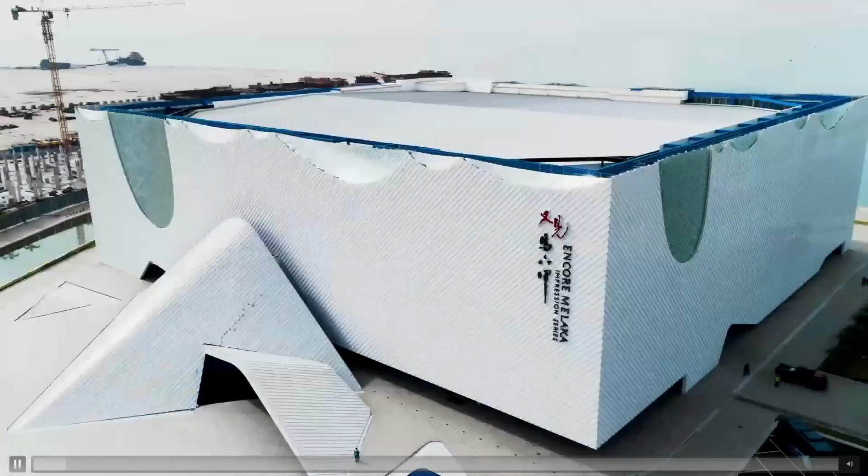In the still rapidly developing nation, new buildings sprout each day as a sign of advancement of society, both in technology and aesthetically. Swissma has been leading the total solutions provider for roofing and wall cladding in Malaysia. Equipped with the highest technological support and innovation, our team put great care in our work, aiming for total customer satisfaction by advanced research and fulfilling the needs of our clients. Swissma guarantees everlasting returns for stakeholders, while also providing precision manufacturing along with customized fabrication, creating endless possibilities.

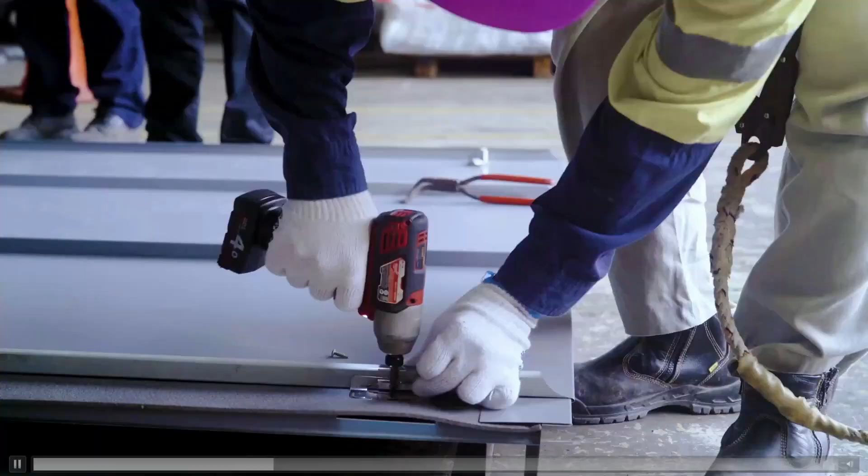Our services include on-site production, providing installation training, craftsmanship quality, engineering and R&D, technical and architectural consultation, receiving multiple award-winning titles such as the Brand Laureate Best Brands Award 2015-2016, Sin Chew Business Excellence Awards 2016, the Brand Laureate Best Brands Award 2016-2017, the Brand Laureate Best Brands Award 2017-2018.

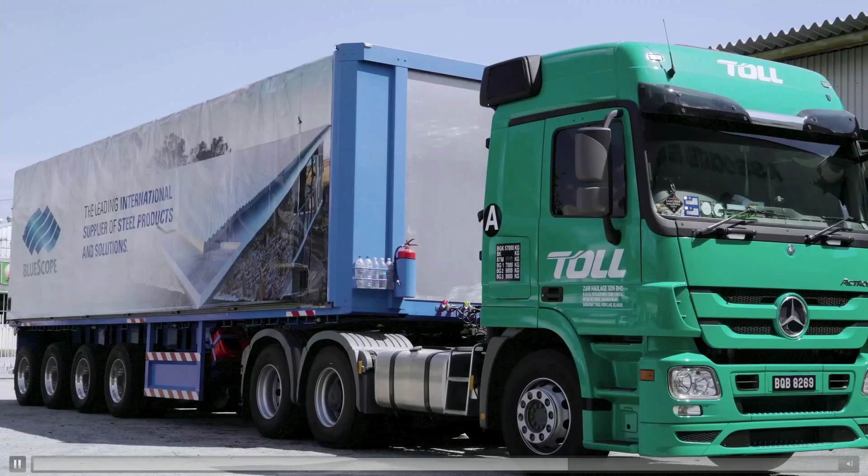Swissma offers sustainable customized solutions using different materials such as aluminium, stainless steel, copper, titanium zinc, TPO or PVC membrane that is FM approved. Most importantly, working in strategic partnership with NS BlueScope Malaysia for solutions in Colorbond steel. Also not limited to specialized projects being public amenities and infrastructure, commercial buildings, industrial buildings, residentials.

Our company philosophy is to provide products and services of the highest quality with sincerity and integrity. With high-quality materials and top-notch service, we are one of the top providers for the industry with a guarantee of satisfaction and excellence in our name. Swissma, your innovative and trusted total solution provider for roofing and cladding. In the still rapidly developing nation,

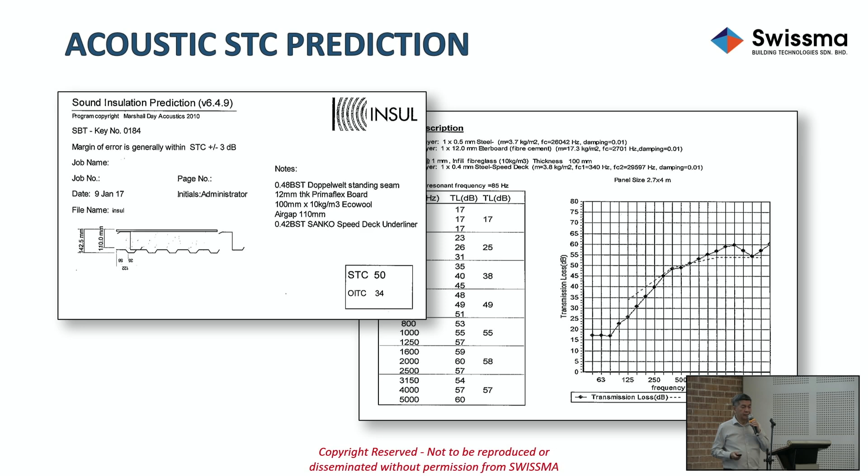So in designing the roof system, first of all, we have to understand your project needs or your technical requirements. For example, the thermal insulation, the U value calculations. Today, it is mandatory that you need to comply with a certain thermal value, which I'm going to share later. Then we also have software to assist in developing a roof system to meet acoustic STC value. That will be another topic on its own. Gutter downpipe sizing, we have software. We can also help to do a quick check on your design if you need that.

Shop drawings, this is one of the key points. In any project, in order to be executed well, shop drawings are key. So we provide shop drawings, and having understood all your needs, then we will customize the roof system.

Material options. In Swissma, we provide a very wide range of material choices. So from Colorbond steel and zinc from BlueScope Steel, titanium zinc, copper, stainless steel, aluminum, and even TPO membrane. You have seen some of these projects in the video. So for coated steel, we work as strategic business partner with BlueScope. So we only buy and sell coated steel from NS BlueScope.

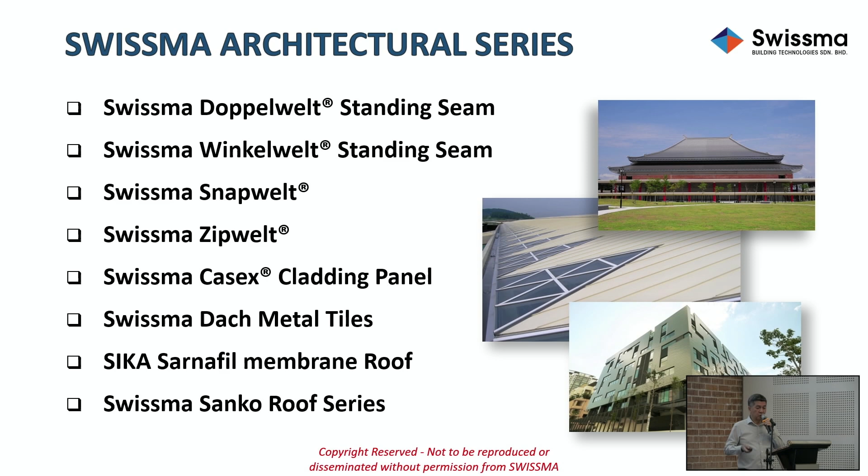We carry a very wide range of profiles. Here is our architectural series. We have the Doppelwelt standing seam, Winkelwelt, Snapwelt, Zipwelt, Casex, metal tiles, membrane. And we also have a Sanko roof series. I will not go into this product because this is just to let you know that we do carry a very wide range of profiles.

So what I'd like to highlight among the architectural series is the Swissma Doppelwelt standing seam. You can say this is our signature product. Just like a restaurant has a signature dish, we have this as our signature profile. So why is this so great? Because it can cover any shapes or geometry. This profile can be tapered and curved, hence its unlimited ability to cover any forms.

Next, we have the Sanko roof series. Sanko is a Japanese brand that has collaborated with us as a partner since 1974, when Dr.

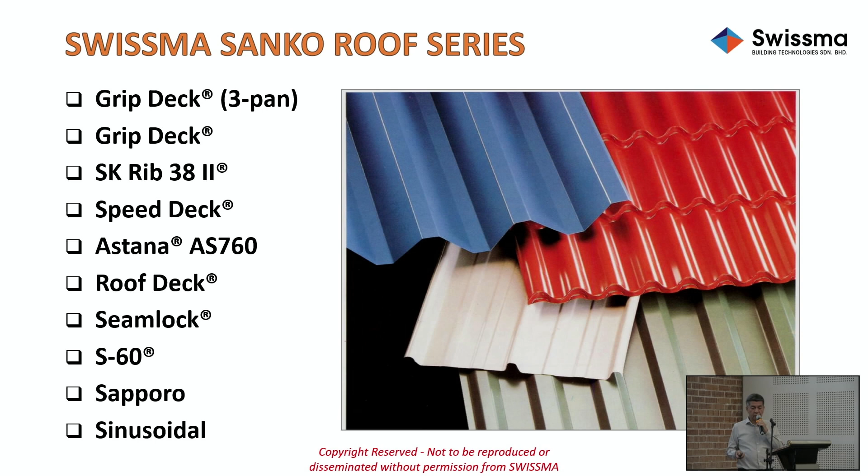M brought in the first wave of Japanese FDI. So in Sanko itself, we have, again, a very wide range of profiles. This is the most commonly used profile, the Sanko grip deck, which is what I'm going to refer to as a clip lock tab in my technical sharing.

And we have very unique profiles like seam lock, which is very deep and is concealed fixed. You saw the video on the site forming, that is the profile. Very good for long length, low pitch roof. This is the deepest profile you can ever get. Looks like a gutter, but it is a profile that is so strong that it can even span 11 meters. You don't need close support spacing.

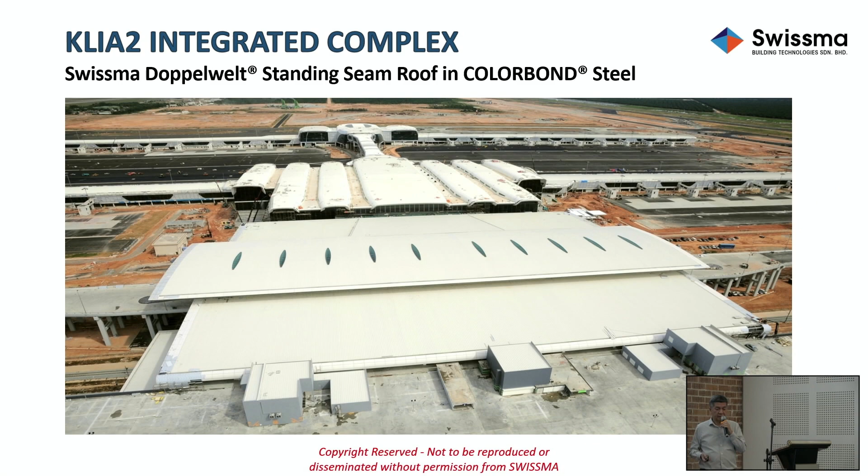So just to showcase some other projects, the KLIA2 projects, we have the Sama Square using a colorbond material, Setia City Mall, IOI City Mall, another mall, KSL Esplanade. This is another, Setia City Convention Center. University Malaysia Pahang, private bungalow in titanium zinc. Another private bungalow, mass housing, another one, hangar.

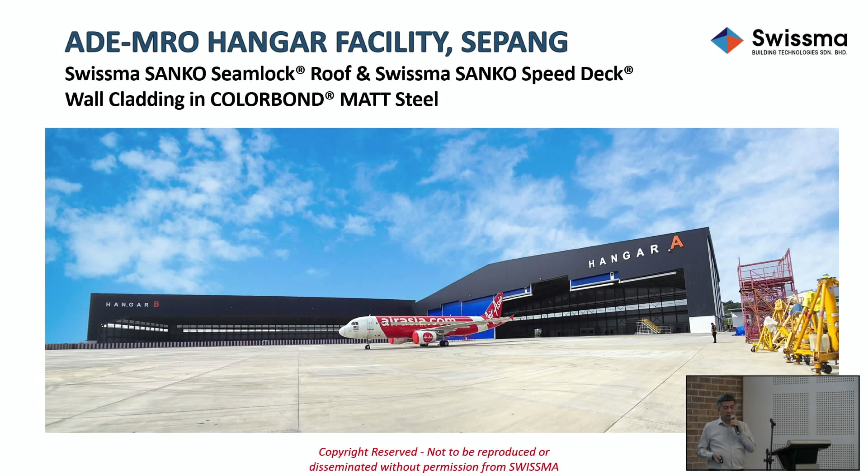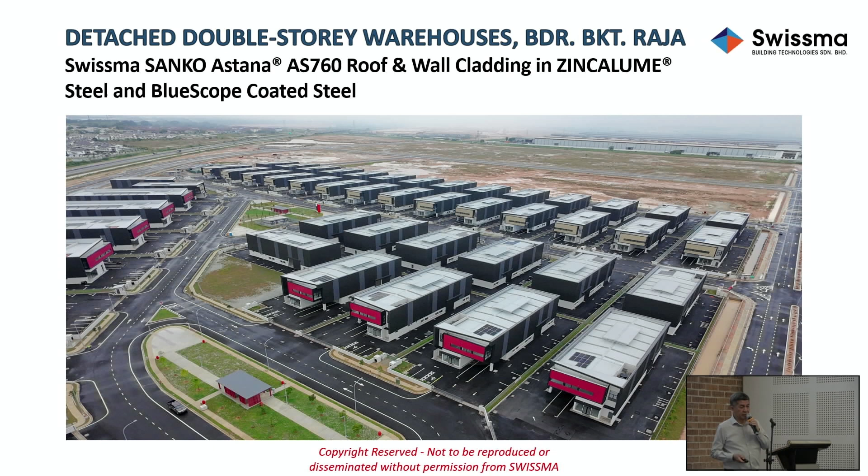So that's a quick sharing about who we are. Thank you.

So now I'll move on to do my sharing on some of these innovative roofing for architects, and I'd like to share from experience some design elements and also what to look out for at the site. So this is just a brief content. The first thing is nowadays I think all of you are already aware that you need to have sufficient insulation to meet the UBBL Clause 38A. Then I'll share about oil canning, something that you can't avoid, and some flashing details, and the use of proper tools, and some sharing of customized shop drawing details. And lastly, some do's and don'ts, which I think is important that everybody knows.

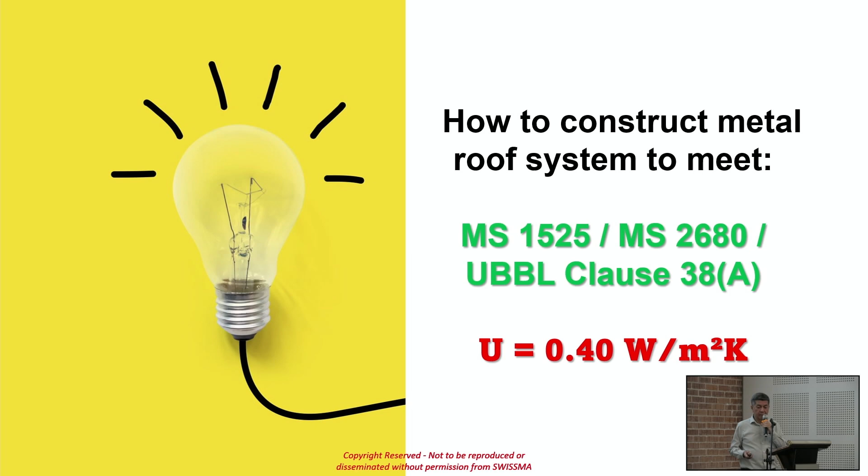Okay, how to construct a metal roof to meet the UBBL Clause 38A requirement. It started from a standard, MS 1525-2680 for residential, and now it's been adopted in the UBBL. So this is an extraction of the UBBL standards, and what it says is for lightweight roof below 50 kg, you need to have a U value of 0.4 watt per meter square Kelvin. For RC roof it is 0.6.

So a very simple formula to share. It's just 3 parameters. First, the K, the thermal conductivity, which is a material property that you need to be aware of. Then you've got to work out the thermal resistance, which is material thickness over the K value. And then, tada, your U value is already achieved. Just a simple formula.

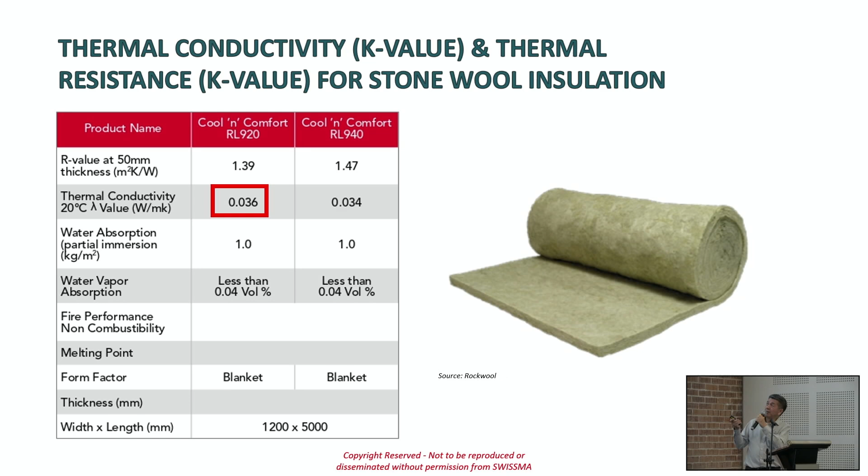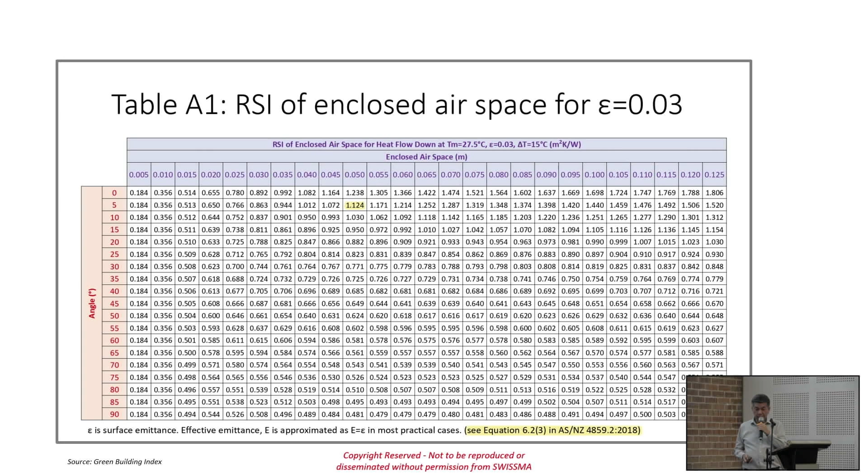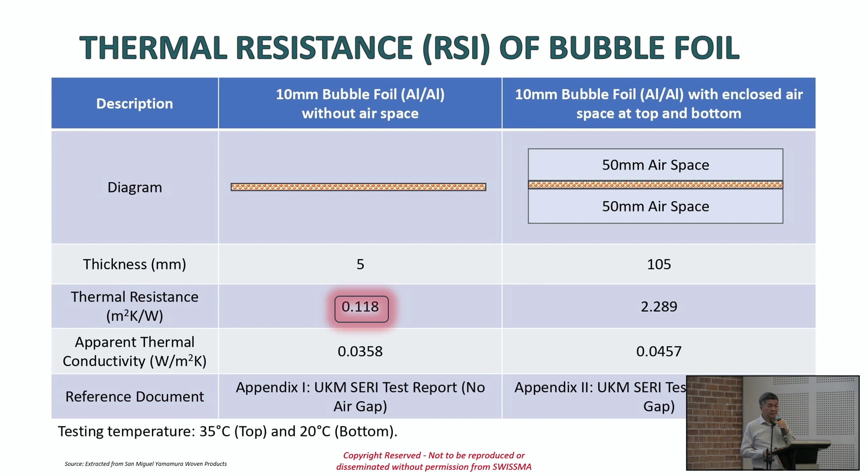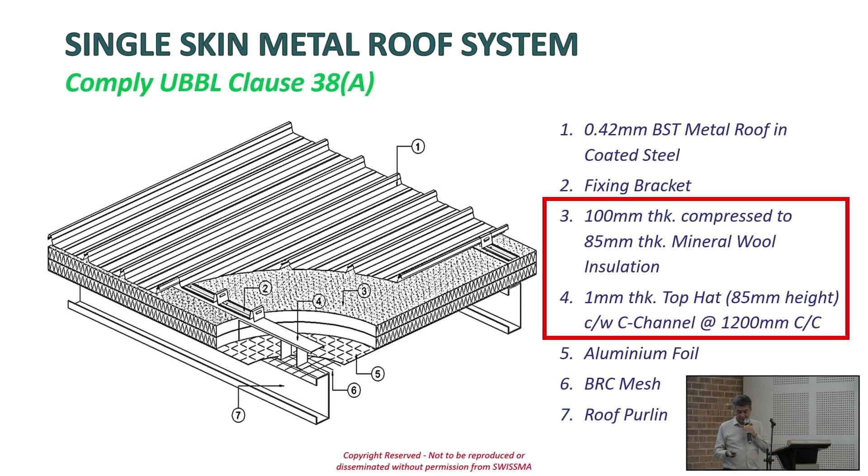So what do you do? You need to increase your insulation. Here, approach number 1 is we recommend 100 mm thick mineral wool, and then you compress it to 85. Why compress to 85? Because the calculations say that all you need is just 85 mm thick to get your R value, to get your U below 0.4. So if you put 100, of course the R value is better. This one is like cukup makan.

And there is a very good reason why we recommend to use 100 and let it be compressed, and that is to achieve rain noise dampening. Because with a metal roof, there are two main concerns: there's heat and there's noise. So if you address the thermal insulation without addressing the noise, then it's not a holistic solution.

So I'll just quickly show you how it's constructed for a single skin. That's the purlin. You either put a mesh or you don't, because today the foil is self-supporting. Then you have your foil, aluminum foil. You've got to use the non-tearable foil, not the paper foil. Then this is what we call the subgirt. You need this subgirt to achieve consistency of your insulation depth.

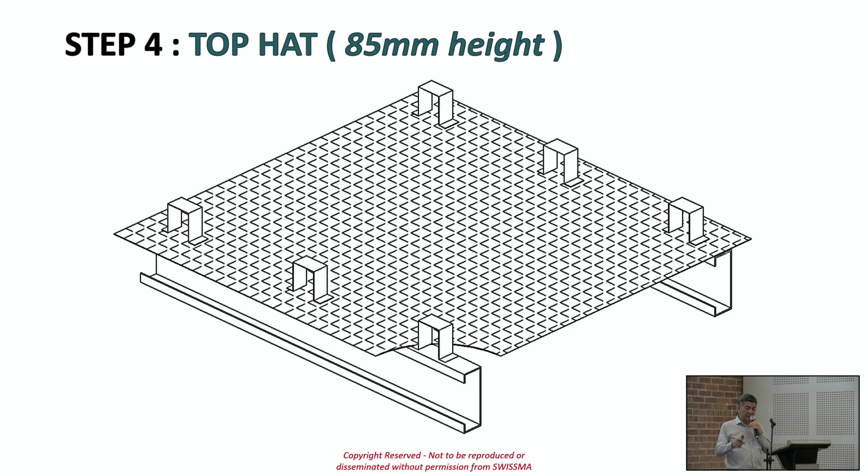The system calls for 85 mm minimum thickness of the wool. So how do you construct to ensure that you always have the 85? So this is how it's done. This top hat is 85 mm tall. Then we add on a C. This is just one approach. To us, this is a hybrid approach. Another approach is to use a continuous top hat. The cost will be very high, but it's more stable.

Then in the market, a lot of them are using just a Z section. But the Z is the least stable among all the systems. So here, then you lay your wool 100 mm thick. It's either one layer or two layers of 50. And then you install your top skin, your roof system. So when you install your roof, the 100 mm thick wool will be compressed down to 85. You can't go below 85 because it's restrained by the subgirt. Then double skin is pretty much the same.

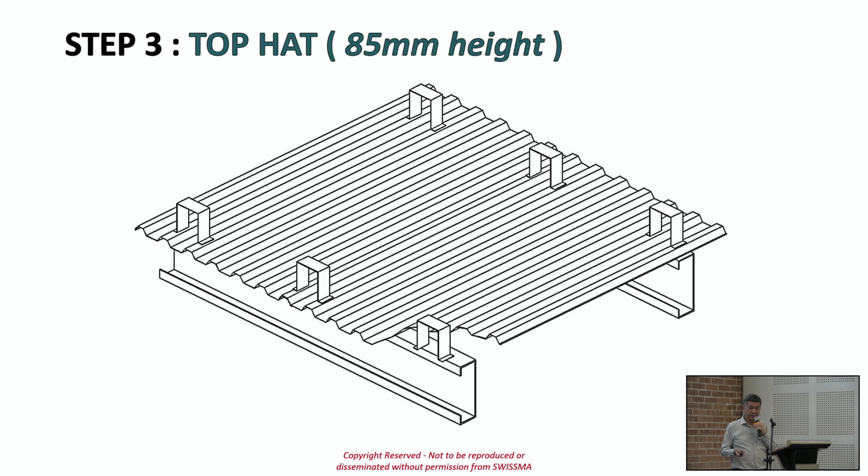Except your first layer, instead of a foil, you have, I'll just show you. Instead of the foil, you have your deck, a metal deck. Then you add on the subgirt again. Usual, same stuff. Then here we put a foil. The foil doesn't contribute to the R value. It's there as a vapor barrier. Okay, if you put a bubble foil there, you don't get the 2.8. That's the biggest mistake. Then you finish up. Okay.

So there are so many ways to construct a roof system just to meet the U value. I've been asked by architects when they have so-called VE submissions, is this okay? Does this meet? So first we look at the calculations, then most importantly, I don't look at calculations alone, I look at the construction, how you construct. So this is another approach. Air is free. So why not capitalize on what is free?

So here we have 50 mm thick uncompressed wool sitting on the underliner metal deck. Then our top hat, or in this case, I just purposely show the Z as an option, is 100 mm tall. So your 50 mm wool is below. Then we install another layer of foil on top of the subgirt before we install this metal roof. So what we get is a 50 mm cavity we call the reflective airspace, which is this, right? There is an R value of 1.124.

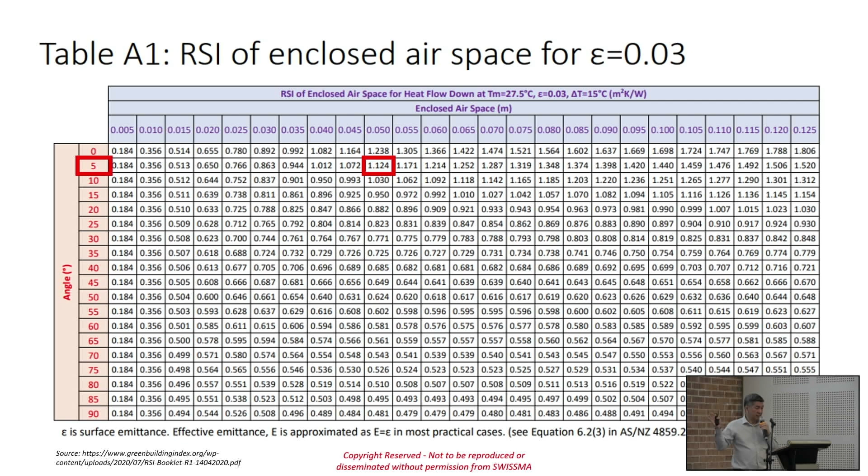This is reflective because to be reflective, you must have a foil. Without the foil, it's non-reflective, and your value is going to be very different. So just to blow up, this is the degree, 0 to 5. For a 50 mm cavity, reflective airspace, your R value is 1.124. So that's the calculation. You have your reflective airspace, 1.12. Tada, you get your 0.37.

Now, like I said, MGBC, or the GBI, they have this attic space R value. So if you have a ceiling in a residential house or project, unlike a factory, you have an attic space where you have air. So in this case, we only need a 50 mm thick wool, and combined with the R value from the attic space, we are able to achieve that U value to be 0.36 even.

Now the key point about this is, I've encountered again and again many times, this calculation is submitted, but you don't know how they construct. And I even have a project case where we submitted a mock-up with a Z. Why a Z? Because we have to maintain 50, right? It cannot be less than 50. So to maintain the depth of 50, you need a Z to control. A lot of projects just do conventional 50 with the foil, magic, no Z. Can that be achieved technically without a Z?

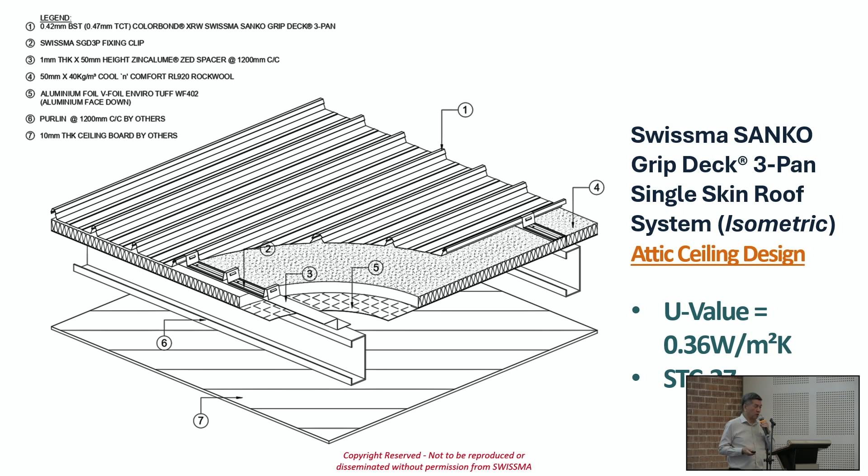You can't. And there are projects done that way, and I'm sad to say, this is due to lack of understanding. The calculation shows 50 mm with the attic R value, but the construction does not ensure you have a 50. It's compressed. So that system failed to achieve the design intention. So this is what I like to emphasize: do ask the supplier to provide a mock-up. I even have a case where the final conclusion is Swissma needs a Z to achieve U, Company X doesn't need a Z. I mean, what kind of conclusion? And that was a real life example. So it's due to lack of understanding.

So then again, there is an AS/NZS standard. I'm not sure whether GBI is going to recognize this. They have a fantastic R value for the inside surface film, 0.8. Normally this value is 0.17. So again, you've got to look at the calculations, and you've got to ask where they get the value from. You just cannot plug in any numbers.

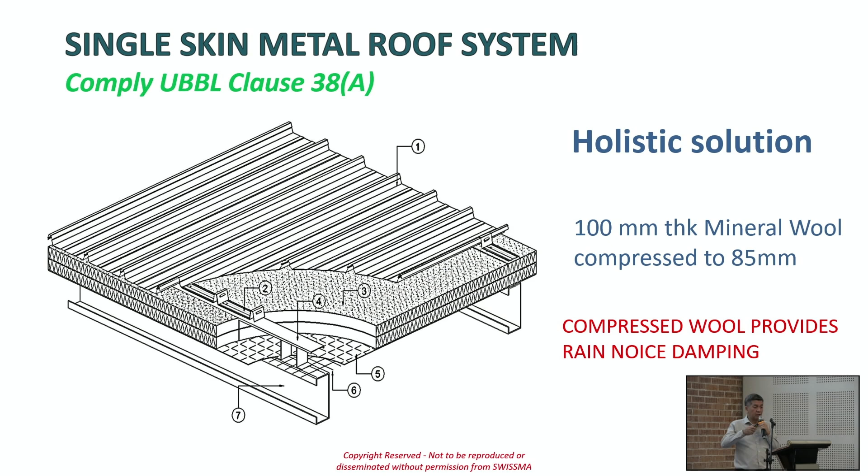So this is how it looks, the one with the 50 mm air cavity. So this one, like I say, meets the U value, but there is no rain noise damping. So you have a U, but you do not address your rain noise. So then again, the compression one, 100 to 85, you do address some decent rain noise dampening. That will give you a more holistic solution.

So then again, non-self-supporting metal roof, single skin. Non-self-supporting are the architectural profiles like this standing seam. A standing seam profile is just a profile that is flat, like you can see, can be 530 or 525 mm wide with 2 upturns. So practically, in layman's terms, it's a flat sheet. So when you have this kind of profile, there's no corrugation, there's no strength.

It's non-self-supporting, right? When you have no strength, that's why we call it non-self-supporting. So this is how it's called seam. It's double seam, like the Coca-Cola can that you look at. These are the double seam.

So you need a support. In this case, the support shown here is a plywood, or it can be a cement board, something rigid and continuous, not intermittent. And then we have a foam. That foam is introduced as a noise dampening foam. It's also an insulator. And in the case of a metal deck as a support layer or underliner, the foam also will separate the two metals.

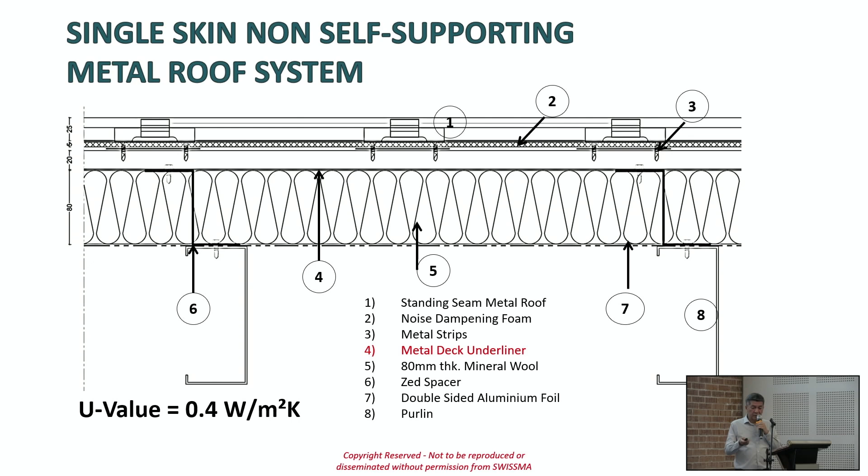So this is an example of the U value, same 100 mm, but what I want to highlight is the construction of it. So you do the same stuff, right? Up to this point, the normal trapezoidal corrugated profile, you just install the roof on top, the clip lock type. But for this, can you actually install your standing seam over this finish layer? The answer is you can't. Very obvious. There is no rigid support.

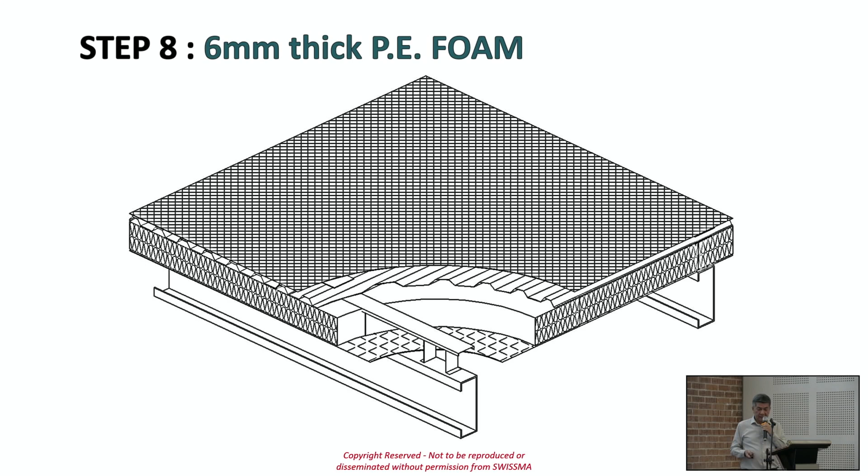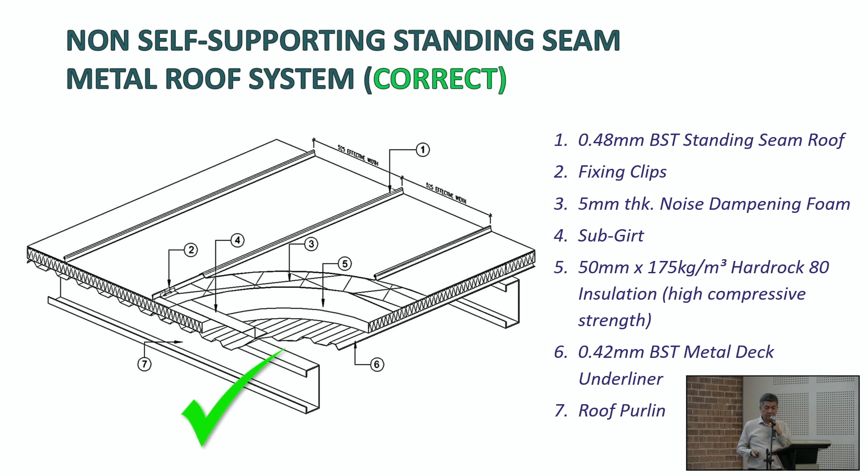So, this is a serious outcome of not having a system done properly. This will be a permanent damage. So this is not oil canning. Later I will share that they think it's oil canning, but it is not oil canning. I have industry players who do this. This is a real life project. I will not quote - I have industry players in this room as well, and I hope we are all promoting the right system for the market, for the benefit of the industry and for the benefit of consumers as well.

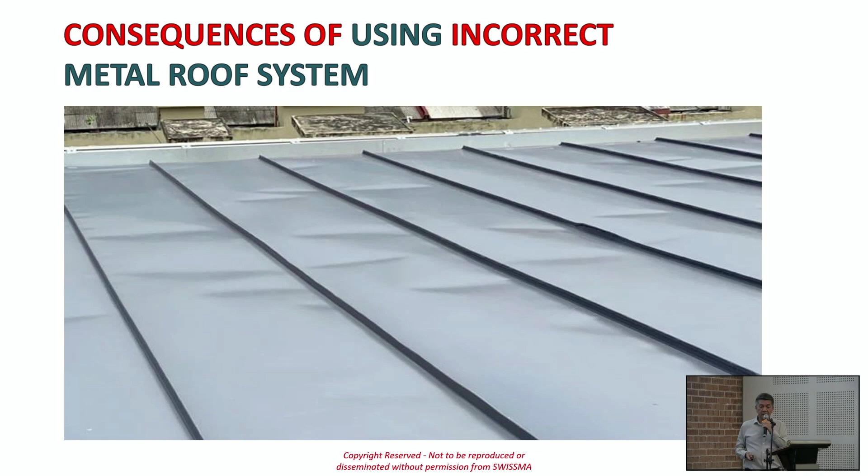Okay, next, oil canning. So what is oil canning? It is some perceived visible waviness, right? It's waviness. Like just now is dented, not waviness. So profiles commonly with broad flat areas, like the architectural profile, are more likely to display this waviness compared to the corrugated. So the corrugated profile, like the Klip-Lok, also has this oil canning, it's just that it's not so apparent. You have a lot of ribs, a lot of mini ribs. When you have a flat surface, it's very, very telling and very apparent. So then the degree of waviness is really tough to measure - they actually measure the wave height.

So it's impacted by lighting or weather conditions - hot day, sunlight, west side, after rain, cold weather, the waviness varies. It looks different. I've got a lot of feedback saying, hey, why is it so wavy on a hot day afternoon? Then in the early morning it was okay, acceptable. So this is not defects. These are just the inherent characteristics that I want to highlight. So this is oil canning.

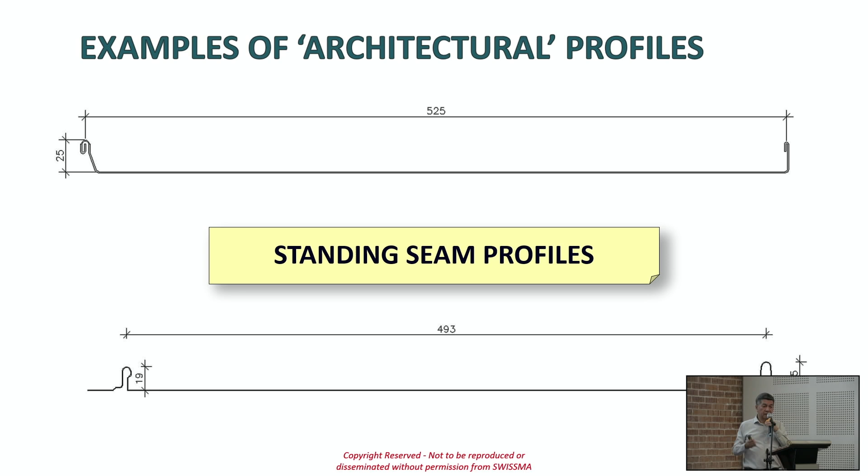Thermal expansion. If your system does not allow thermal expansion, then when it expands, it causes stress, induced stress, and then it will buckle. It's some kind of buckling that causes oil canning. The standing seam has sliding clips to allow for thermal expansion. If you install without the sliding clips, then you will have a more serious effect of waviness, and you won't know why.

Then material thickness. Thin material tends to have more serious oil canning, so thicker material is better. Again, it has to do with the support. If your support is not in alignment, it's going in and out, it's pulling the material, definitely you have very serious oil canning.

So what do we do to minimize it? Generally, the thickness - the thicker, the better. But you cannot say I want a standing seam 1mm thick in Colorbond steel. It cannot be done, it's too hard to fold. Because you've got to fold it very severely, it will crack. If you use non-ferrous metals like aluminum, titanium, zinc, yes, you still can manage, but that's about it.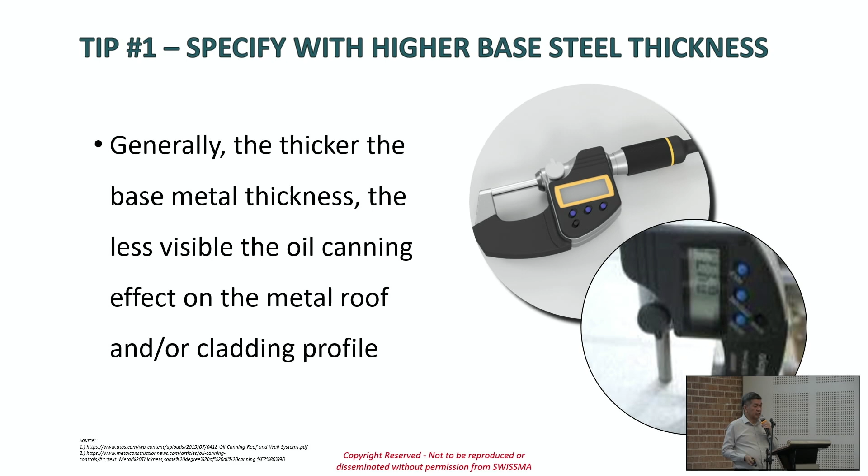So color - this is again very subjective. What we gathered from research is that lighter color... this is about matte now. Of course the matte finish would be the preferred choice. When you have a very glossy surface, it amplifies your waviness.

Then the color. Apparently lighter color - before this I always had the belief that dark color will be a better choice, dark matte. But apparently dark color has one inherent characteristic: it absorbs a lot of heat, which induces more expansion and movement. Also, dark color as a background seems to amplify the waviness. I'll share some photos later. But if you use a textured or embossed surface, it diffuses the reflection, and you can achieve a better finish.

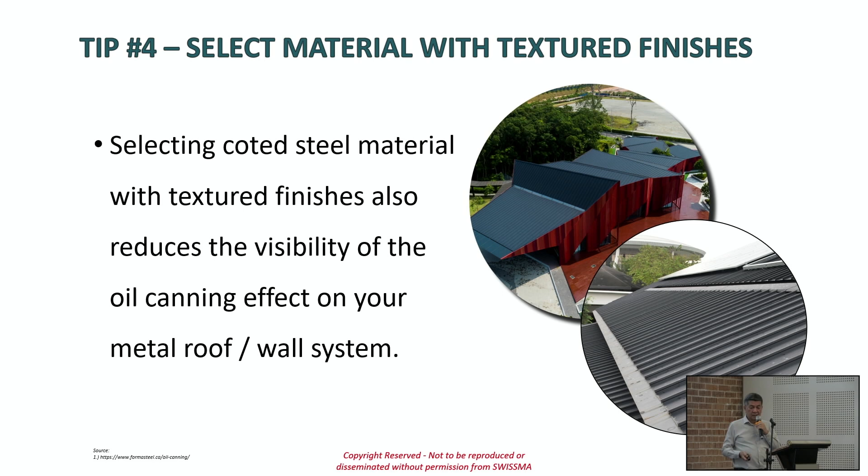So this is Alameda, 1mm thick aluminum. It's very nice, but it burned 3 of my seaming machines on the job because the machine from Europe is not designed to take that thickness. So it's by force - but like I said, this is a good example of minimal oil canning.

These are foreign projects. If you look close enough, you can see the oil canning, because once you seam, you move, you induce stress. The less you disturb it, the better you are.

So for standing seam, we have a single lock and a double lock. Single lock is one fold, 90 degrees. Double is double - you fold it down again. For cladding, if the wind is not severe, we go for single fold, because the second fold is going to induce a lot of stress, and that's where you get more serious oil canning. But we have a snap lock system that looks like standing seam that you actually click on without inducing stress, like the link.

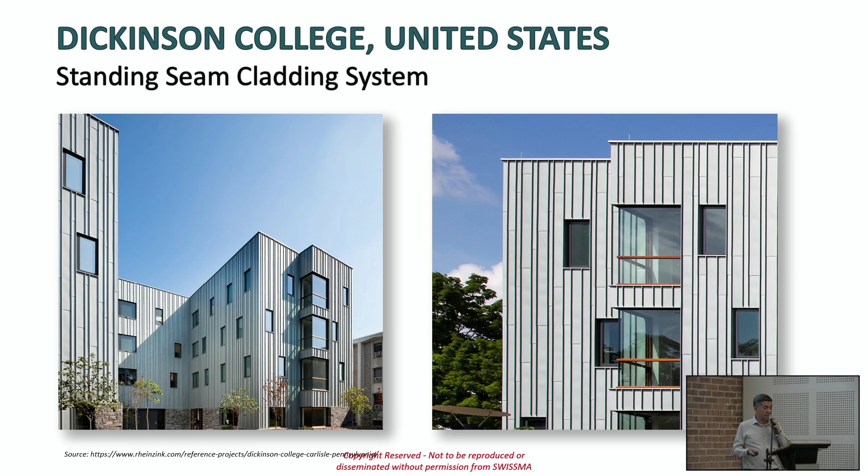So next, sharing some flashing details. This is a typical ridge capping, all right? Everybody does a job with a ridge capping somewhat like that.

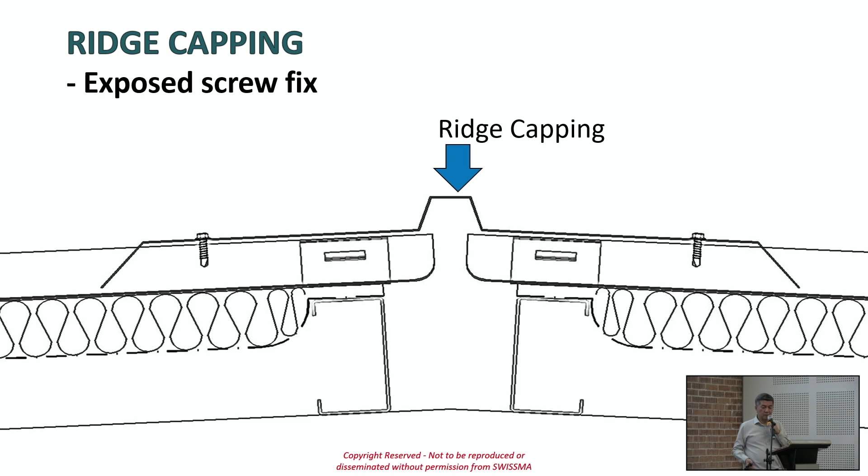Like this project, what I'm trying to emphasize is screw-on, where you screw the ridge capping onto the profile. But can that screw be avoided? Can you have a concealed fixed ridge capping? Certainly you can, like this. We do all our standing seam profile with concealed fix.

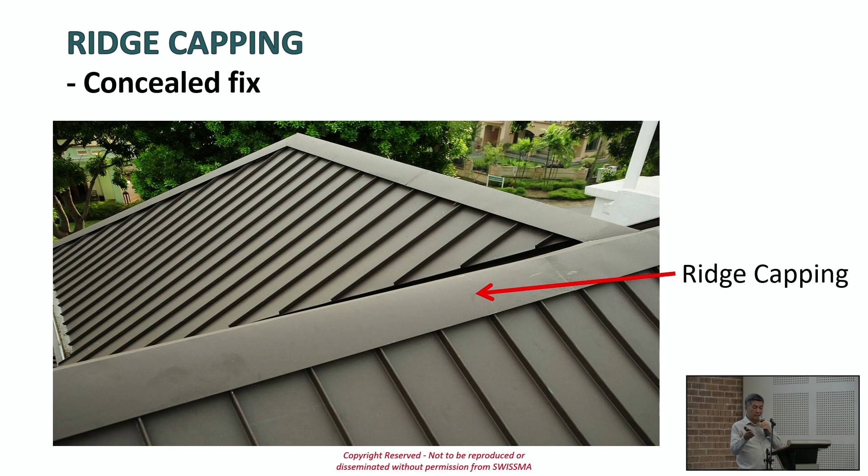Concealed fix, because that's where you get your quality. You pay a lot more to achieve a high-end finish. Imagine you screw up on the ridge. So similarly, this kind of concealed fixed ridge can also be done on the clip lock type.

It can be done, the only thing is it has to be specified and costed in. I'm talking about reality here. You don't go to your project and say, hey, I heard this can be done, why aren't you doing it? Who's paying, right? It's always the case, I always have this issue confronting me.

Then your flashing size, why so small, it cannot cover that? Your BQ says it's only that big. Anything bigger, who's paying? I'm just highlighting these are real life issues.

I've been on the roof on projects where I've been questioned. I look at it and ask, why so small? Yeah, it should be bigger. Then the contractor says the BQ states that is the size. To extend that, who's paying?

So the developer also stays silent. So again, what you want has to be translated into documents so that the system design and cost is captured.

Standing seam screw fix ridge capping is also done, because you cannot reject it if you didn't define it. You didn't say it has to be concealed fix. So typically for a gable end, if you're talking about a clip lock type, that's a screw fix, right?

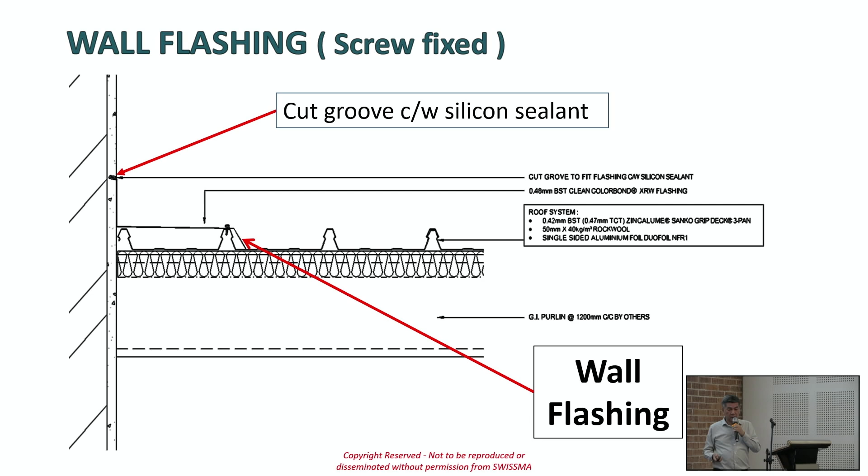So to me, it works, but it has to work well with good workmanship. Otherwise, we recommend a better solution: double flashing. You can have your first flashing without a cut groove, just tuck it in, open the joint, and put some silicone there - that's your secondary defense. Then on top, you have another flashing to cover this.

And here you can cut groove too, same detail, so you have double protection. One more point why this is more foolproof - because this one on its own is attached to the roof.

When the roof expands due to thermal expansion, especially with very long lengths, it pulls the flashing, so your silicon gets weakened. So on a hot day you might get more problems due to the expansion. So this, again, is good to have, but please cost it in, budget it, and draw it in so QS captures everything and it will be okay.

So another thing from observation of industry practice - true or false: flashing must always be GI, flashing must be specified in gauge for thickness, and flashing must always be thicker. This is what I've extracted over the years of my experience. I've been in this industry 37 years, right from the very beginning to now. This doesn't change from 37 years ago till now, the only reason is cut and paste. So, is it true?

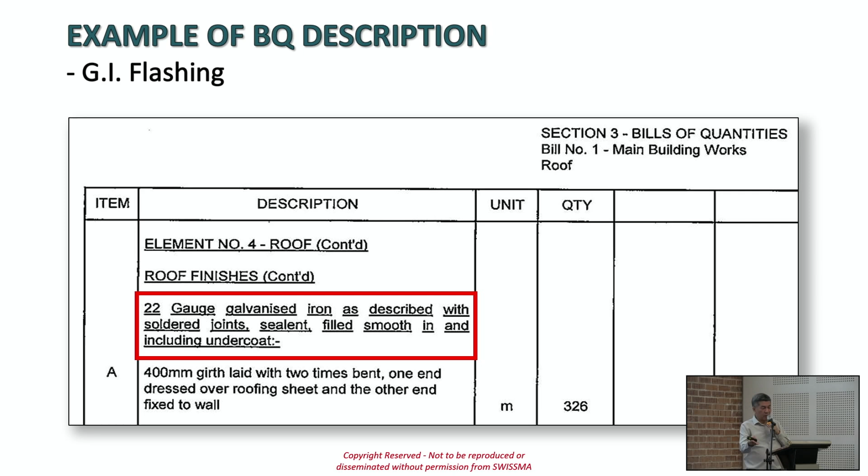You did it for gutters in those days. I don't think you can get anybody to do soldering now. The tinsmith soldering shop has also closed already. Okay? So this is your tender BQ. Can you imagine? And it's true. It's a real BQ. So it's GI gauge 22.

Can anyone tell me how thick gauge 22 is? How thick? Is gauge 22 thicker or gauge 24 thicker? Anyone take 24 as thicker? No? 22 is thicker. The smaller the number, the thicker. It's more for the wire gauge, all right?

So gauge 22, the project guy who wants to do an honest QA/QC also doesn't know what thickness to check. Right? There is no meter to say gauge 22. It's only mm. So gauge 22 is supposed to be 0.7. But again, the word gauge is like thickness. You don't define it. You've got SWG gauge, American gauge, British gauge, at least 7 to 10 variations. And they all come out with different thicknesses, 0.7, 0.6, 0.65. So you are not specific.

Next thing is the GI. That one, I will come to later. So when you have a Zincalume roof and you put GI in your flashing for tender, your end result could be like this, right? The GI did not perform in terms of durability in tandem with the Zincalume material.

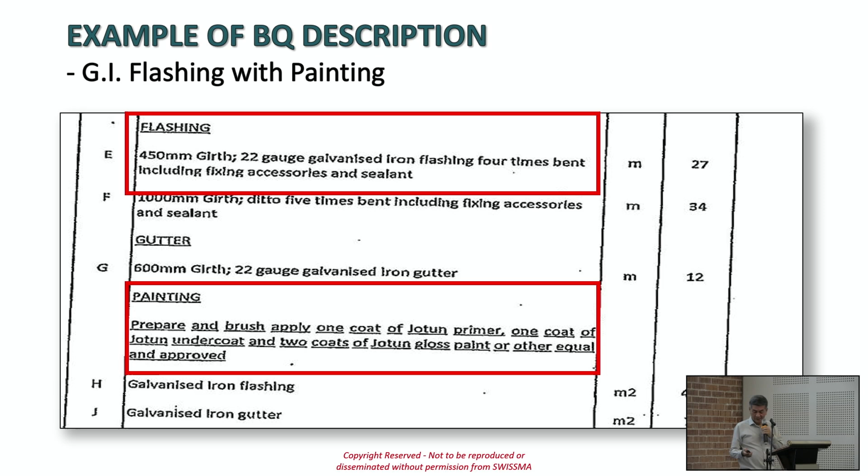Another one, sharing. This is all actual BQ. Here is gauge 22. Down there, because it's a color roof, they have painting over the GI. Very professionally done. Jotun paint. Must be a very good paint. They specified Jotun, how many layers of coating, blah, blah, blah. So what you are telling the contractor is, you buy GI sheets, you fabricate, then you paint according to these specs. Right? That's what you say. So what do you get?

Very likely this. The paint has got no adherence. Field painting has got no proper control of your surface. The way Colorbond is coated in the factory, they clean the surface to get rid of oil and dirt before painting. This one, field painting. No adherence. Terrace houses, you look at them, mostly like that in those days. It can be overcome with the right specification. Will you send your car for repainting if they don't have an oven? You don't. You need to oven bake. That's the key.

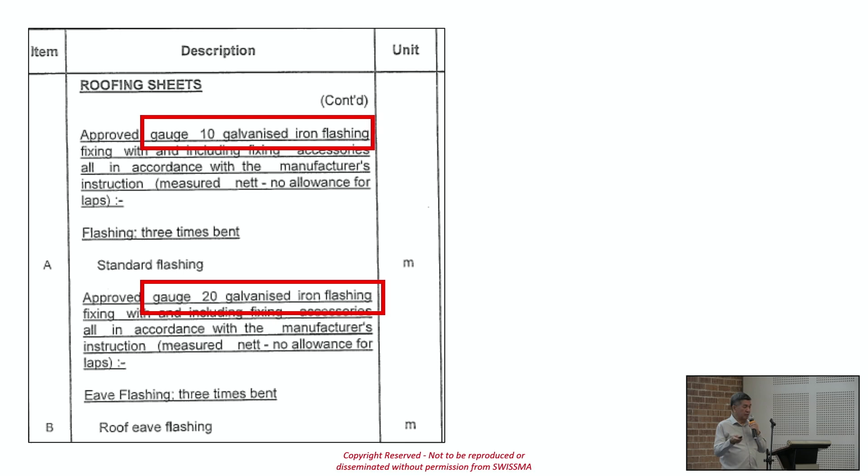So this one is even more interesting. You've got two different thicknesses, galvanized. Gauge 10 on top, gauge 20. I also haven't got a clue how thick gauge 10 is. It must be very, very thick. Maybe 2 mm. Then gauge 20. Gauge 20 is supposed to be 0.8. The standard is 22, 24, 26. Metal roofs used to be sold by gauge number. The 0.42 BMT that you commonly use is called gauge 26. Is anyone still looking at gauge numbers for thickness?

That's how it is. So here the thicknesses are not well defined, and you've got two different thicknesses. Even if you specify correctly, my practical advice is one thickness per project, unless your roof is 0.48 BMT and your cladding is 0.42, for example. We receive inquiries for projects with different thicknesses for different applications. There's not enough quantity to order the coils. You know what I mean? This is business reality. I'm not going to order 6 tons to supply you 500 kg. No industry player will do it unless they have ready stock. Okay, this is something practical to take note of.

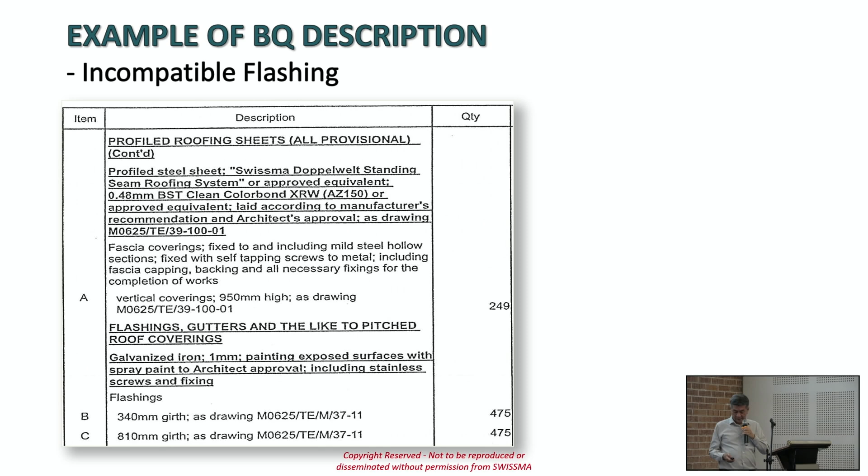Incompatible. See, this is our product being specified, very grateful. We saw the architect, everything done, system developed, blah, blah. Swissma Doppelwelt standing seam. Right? Then the BQ came up. What happened? Again, the galvanized iron. You see? And the best part is this galvanized iron is not a gauge number. They have improved to 1 mm thick. And then the exposed surface with spray painting. They don't even tell you what paint, Jotun paint, how many coats, just spray paint. So that is your spec.

And they put stainless steel screws. Stainless steel screws are not compatible with carbon steel material. I'll share that later. So all this is in the tender. And when people come to us to quote, I'm really lost. Right? The contractor also doesn't know what to do.

But you can laugh at it, but this is real. Right? This is real. So that's why I say, as an architect, do pay some attention to the BQ. So I was saying galvanize, the word galvanize. Galvanize is just like zincalume. Right? The metallic coating is not specified. They go for hot dip galvanized also, how many microns, right?

So this galvanized, you can see that galvanized Z12, 120 gram, 180, 220. If it's only 120 gram, this is what you get off the rack if you don't specify. 500 hours salt spray, already condemned. Your residential house party wall is very likely made of this and just painted over, brush paint. So you can avoid that miserable party wall which I hit when I was staying in the terrace house.

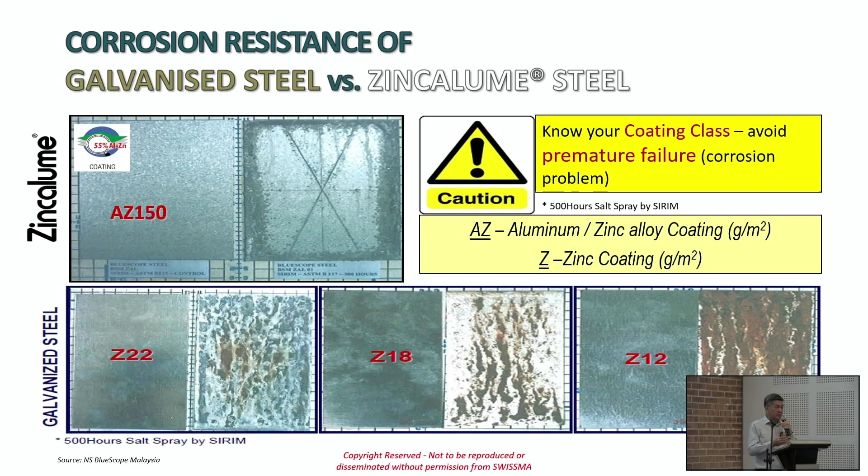It's so badly corroded. Okay, so again, like I say, even if you want galvanized, I'm not saying you can't. Please specify what's the coating mass, metallic coating. If you don't specify, you'll get the cheapest. Contractor's mentality.

So there's nothing wrong to specify the flashing using the same material thickness as the roof. You got uniformity, you got similar performance in durability, then move on, bingo. That is my recommendation. This is again ridge capping, same thickness. So specify material of the same thickness as the roof. Try not to use thicker because you might have problem managing your project.

Supply issue. And specify thickness and the girth, because if you don't specify girth, the 600 coverage, you get a 450, you get a 300, then you get that short coverage on your roof. So this is by way of specifying that you avoid those kind of horrible outcomes.

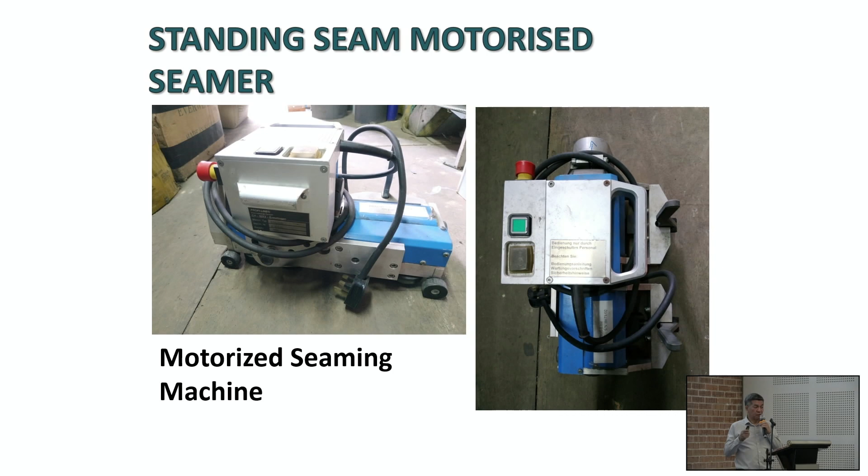So you have all these dedicated tools. I'm not sure whether you have seen them. Like I said, standing seam is a European system. It's not Australian. These are tools from Europe. They are all for a purpose. The hand shear, the curved one, is unlike the normal shear where you cut and then you get stuck, just like your scissors cutting a paper. This can cut from one end to the other end without any interruption.

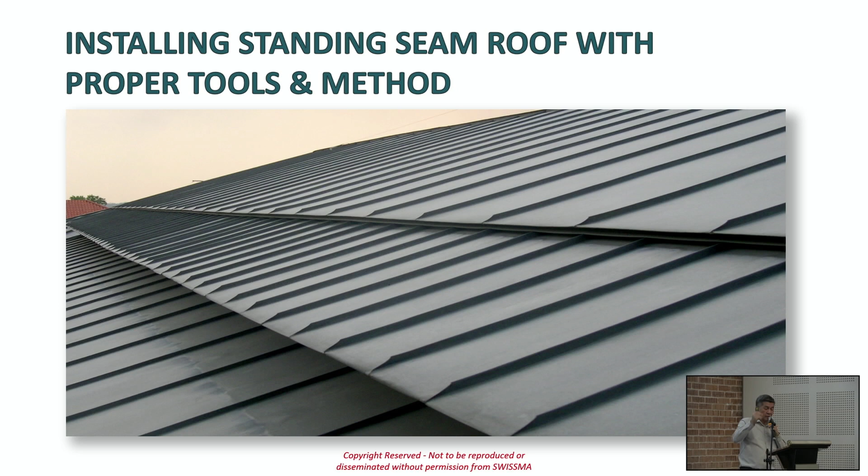So you need a mallet. So this fixing method, you have a seaming. I will not play the video. So at the end there, the eave, you need to knock it down using a rubber mallet. If you don't have a rubber one, you use a hammer, that's it. So what happens is, if you have the right tools, you can do a good job. Like this, the eave, you got to skive, you got to knock. If you don't have the right tools or the skill, you get this.

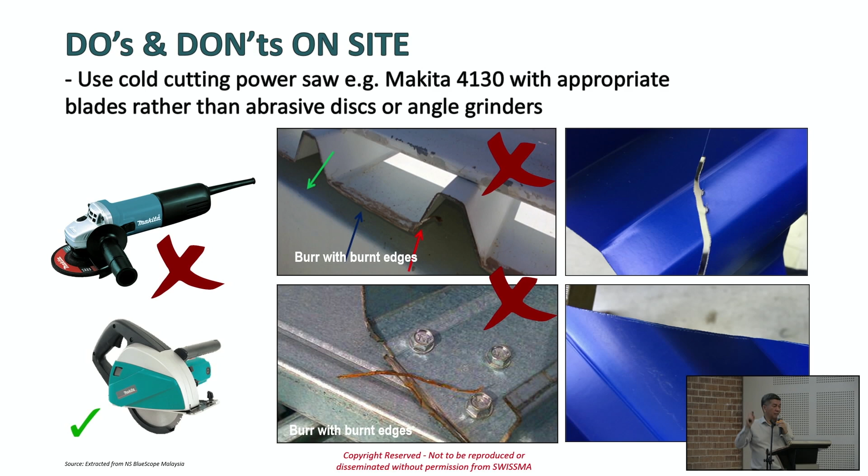So what you get is, when you use the hand shear, and that one, the cut edge still has the galvanic protection from your coating mass, whether it's zinc or zinc-aluminum. Use that, you cut the surface, you burn it, you damage it, no more protection. You start to rust, just like this. Right? These are due to wrong tools. They actually use oxy-cut even sometimes. All these will burn the edge, and you will have permanent rust.

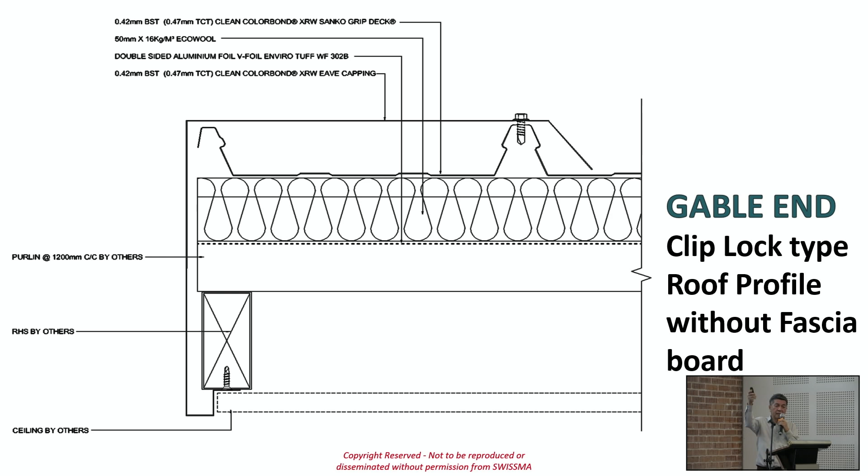Shop drawings. Okay, this is a clip lock type. So on your eave, you have no choice. Right? It's better straight down or do whatever. But if you do a standing seam, that's your neat choice. Right? If there's a fascia board, you can do this for the clip lock tab. If no fascia board, again, whether it's a straight line down, if your surface is 400, 300 plus, this could be an oil canning issue.

Now, this is a gable end. This is the interesting one. Gable end, see the standing seam is so neat. Standing seam type roof on the mono-pitch design, all sides are the same. Very neat. Not in the clip lock tab or the trapezoidal profile.

So on the top, this is a clip lock tab. Your capping has to cover the corrugation, right? You have to cover. This is for the trapezoidal or clip lock tab. But for standing seam, no. It's the same treatment. It can be done as an eave, as a side. All the same. So that's why standing seam is an architectural profile.

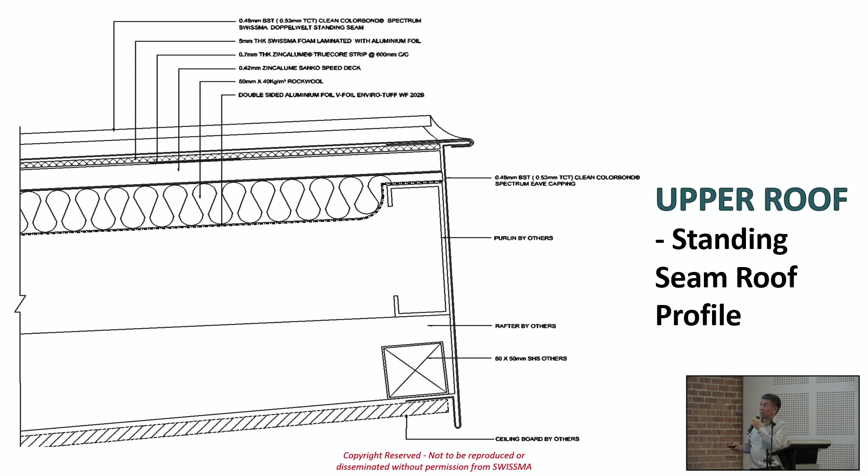If it's a trapezoidal clip lock tab, no way. I used to answer no way. Because the developer also said standing seam is very expensive. Why not clip lock tab? I said it just can't work in your project. It just can't work. Right? Even standing seam is already a challenge. Standing seam can be folded, can be manipulated to meet your requirement, but not the trapezoidal.

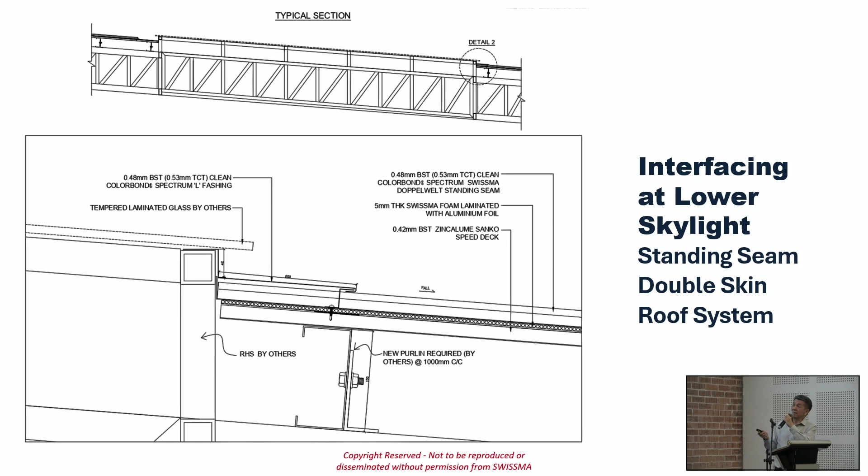So this is the lower end of the skylight. Upper end. This is the most difficult part because you're interrupting the flow. Where is the water flowing? Right? So when you have a continuous long skylight raised up, you need to have a gutter already. There's no other way.

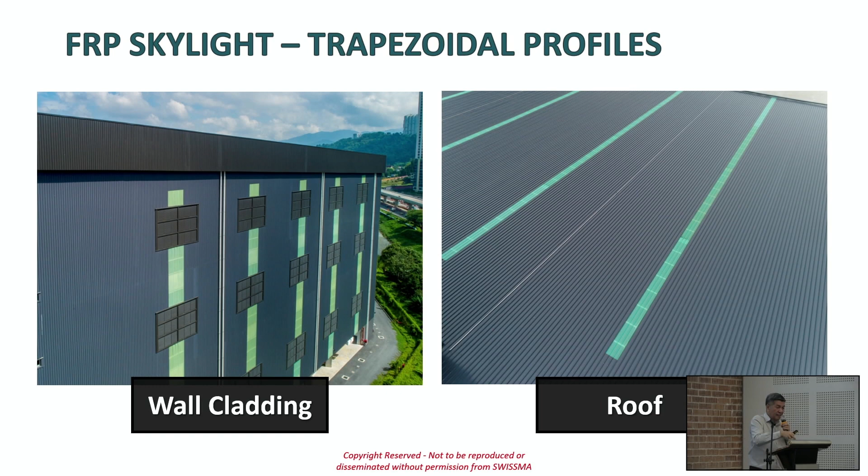So skylights for factories, typical. Those days, easy. Today, because of the U value, remember, so thick, right? So thick. So you cannot just fix the skylight like before. So you need to have a system. The skylight has to sit on the subgirt as well. Otherwise, it's floating there, and you've got to do a capping on the side to seal up. So you need to provide detail. Without detail, you leave it in the hands of the contractors.

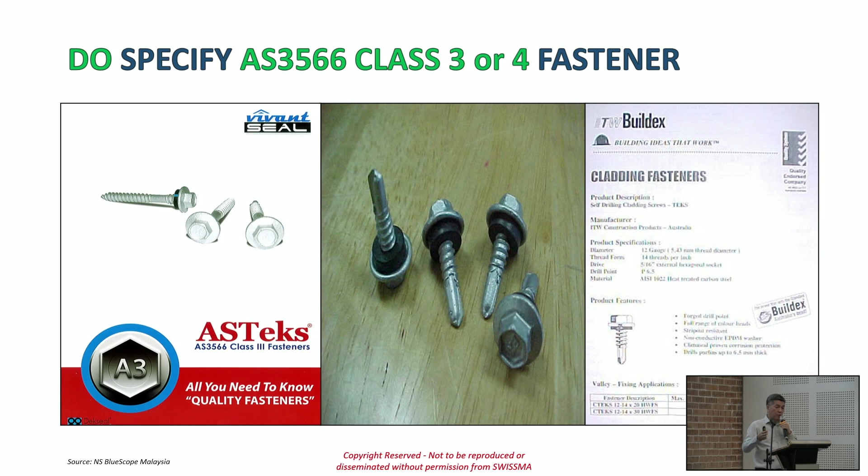Screws, this is the least attended to. Right, nobody specifies screws. You put up your whole project, everything proper, but you didn't specify your screw. Right, there is a screw specification. You use class 3 or class 4 for corrosive environment. So then stainless steel screw.

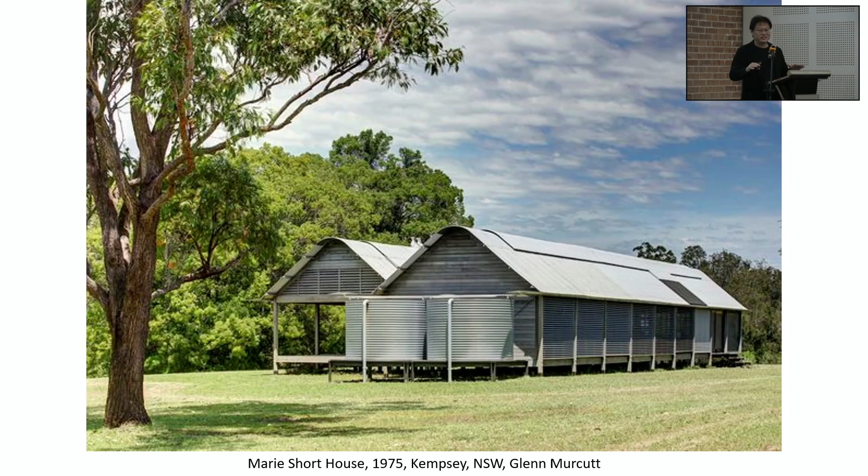And one of the things I really loved about this house was there's no ridge, and they could bend the metal. And those days we used to use Custom Orb, those of you who practiced in Australia before. And getting rid of that screwing on, the messy detail of the ridge, having the corrugated metal being able to curve over the form, took away from the traditional pitch roof and created a new form. It looked almost like a leaf. Those days, he likened it to the gum tree leaf that fell on the ground.

That steel was malleable. It could actually handle a curve. And the way the building is lifted off the ground, and the whole concept that came from Aboriginal thinking about lightly touching the ground. And at the same time, it dealt with termites, it dealt with cross-ventilation. Interestingly, a simple little house like that became one of the most influential buildings in Australian history.

So when we look at this, we are reminded a bit about our kampong houses. Okay, except that the detailing here is really simplified to Miesian standards. And to me, when I saw this, it greatly influenced the way I think of slimming things down and paring things down to convert craft, a typical farmhouse craft, into a piece of art. And I think that's what we have always been endeavoring to do in architecture.

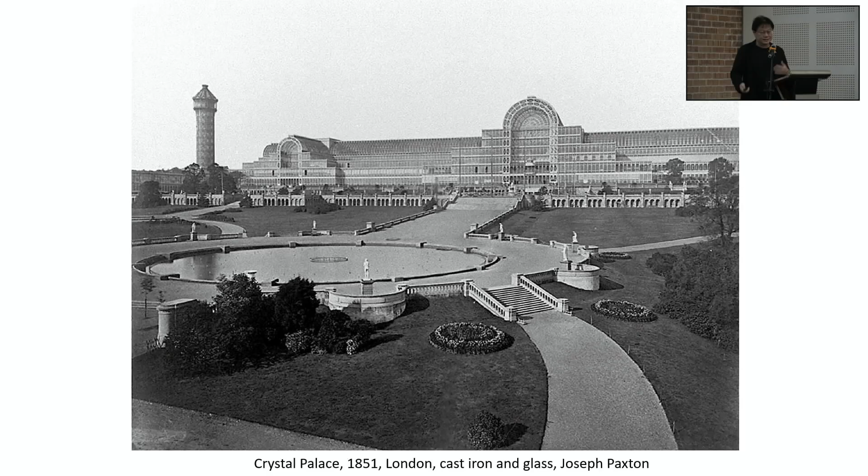In 1851, the next great building that used steel, and a significant one, was the Crystal Palace by Joseph Paxton. Those of you who study architecture, in your history of architecture, you have seen this building. It was the introduction of glass. It was built almost like a Gothic cathedral, except that instead of stone, it was replaced by steel. And instead of infills of stone and brick, it was replaced with glass. And it became a very significant building. This was during the expo that was held in London.

Today, our expos have sort of lost their meaning, in the sense that there's not much innovation, there's not much stretching the envelope, but rather you find in the pavilions we sell bird's nests and durian cake and all those things. Whilst the original intention of expositions was to use it as an experiment to show how great our technology and innovation is.

The first high-rise building using steel was the Home Insurance Company, followed later by Sullivan's high-rises, okay? So this was a steel frame building, 1885. And then in 1889, Eiffel Tower, again, this was in an exposition, the Expo of Paris of 1889, and they built this structure that still stands today. Then came the Art Deco, Art Nouveau movement, and you find steel being molded into the merging of craft and technology and art coming out into the metropolitan train stations.

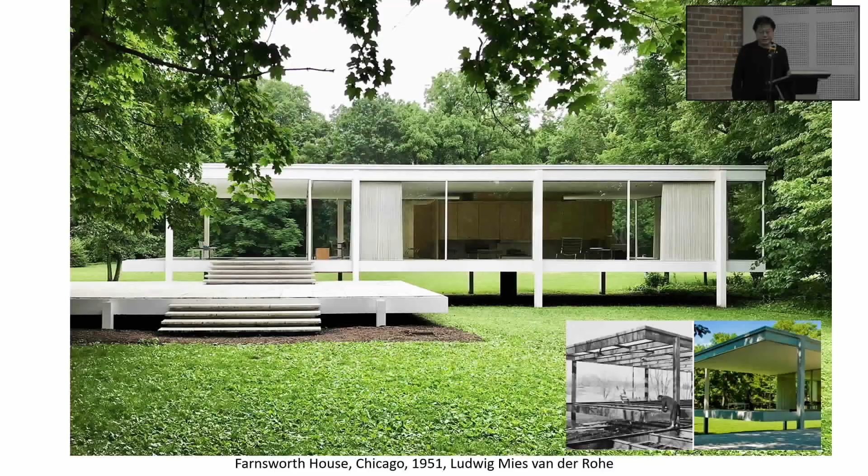It's pretty incredible. And the cruciform column, those days they didn't have all this. It was actually an assembled column. And you find, if you go and see Alila Uluwatu by WOHA in Bali, there's a lot of the impressions of this over there. Then he did the Farnsworth House, and I put in the pictures of its construction.

Till today, sad to say, we've been practicing 30 over years, I've never been able to build a roof as thin as this. And to me, try as I might, because I don't know whether it's the tropical thing or I still haven't moved my craft into art. My gutters are too big. I'm always afraid of the rain. And therefore, after a while, you see the top part becomes thicker and thicker. And the moment the proportion is gone, it doesn't look like this.

And again, you find the house is lifted off the ground. And even the steps are like floating. And this is known as the Farnsworth House. And it's a steel construction. And the first real piece of art without any decoration. Before that, you find all the steel framing going up for high-rise buildings, but they still put a lot of stone on it and decoration and moldings. So when you look at it, it still looks like a wedding cake.

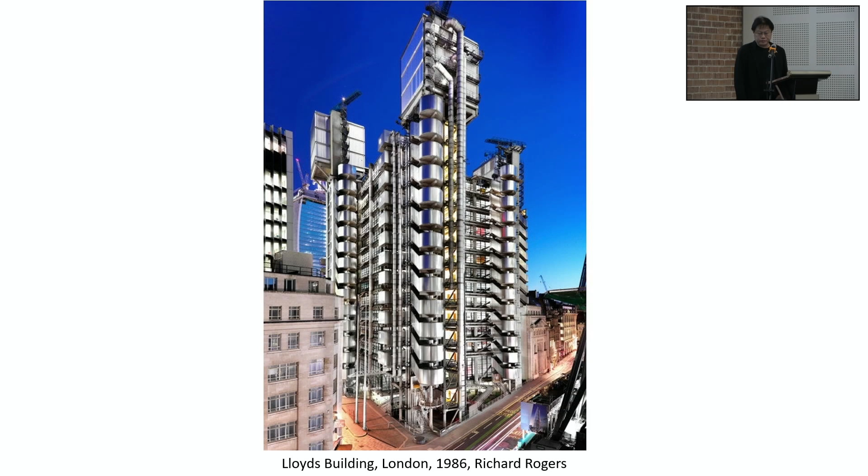And Mies, when he did the Seagram Building, he took it to the ultimate. It is a modernist, clean structure, and I really love this building. Those of you who have been there, it's almost still exactly the same as it was before. And his detailing of how you do curtain walling, etc. Then in 1977, the high-tech movement came, and this is the Pompidou Center, which is still there, and if you get a chance to go and look at it, you should. And after that came the Lloyd's Building by Richard Rogers, 1986.

And in 2003, with the beginning of computers, parametric design. I think most of us do parametric design now in our offices. And your new graduates, when they come, don't hold them back, because we always say all these things cannot be built, but there are living examples of them being built. And the kids today, when they play a computer game, they can see so many things that are happening, and they can still shoot the bad guy. When we look at it, we can't even tell who's the bad guy. And we can't find our way around, because some of us are from the old generation.

Bloomberg was the first one to come up with a new screen that had a rolling bar at the side. And even that we found quite confusing when it first came out. Then CNN came out with the rolling bar at the bottom. And today, when you don't listen to the news anymore, you just look at the rolling bar and you got all the headlines. So we start to become more perceptive. Our eyes can see, but whether our brain can actually program it and translate it to reality.

Those of you who have been to Los Angeles, please go and have a look at the Walt Disney Concert Hall. An amazing piece of sculpture. And as Ronchamp, Le Corbusier's ultimate last building, to me his greatest building, Ronchamp Chapel, this is also like Ronchamp Chapel, just as much as the Bilbao Guggenheim. When you go into the building, you see light penetrating and giving you goosebumps, it's as though God is in that building.

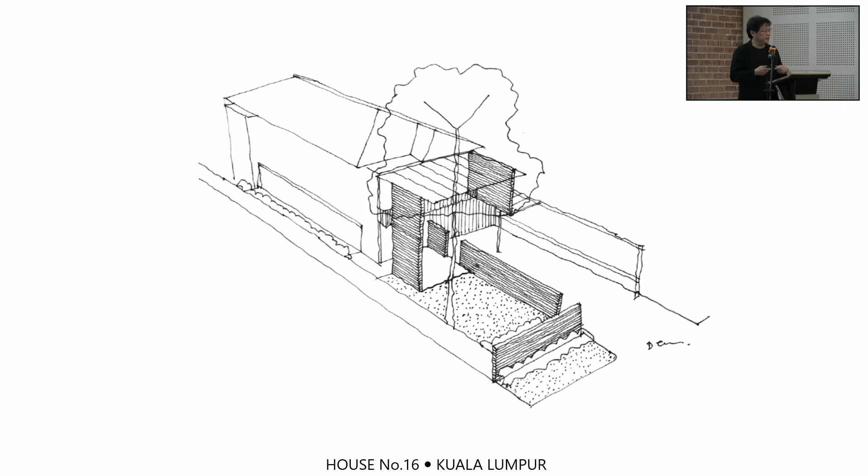So I've been increasingly using steel in my work. And if you look at this simple renovation, I'm not going to talk about the design, I'm just going to flip through very fast because it's nothing compared to Guggenheim and all this. But I could only have done that long span with steel because it is light, and it looks very modern. And I merge it with brickwork and glass.

So in a way, I'm transitioning from just traditional buildings. I'm starting to incorporate steel into my work. And balconies can cantilever out. You know, balconies are never used in Malaysia because they are very dusty when they are tiled. So when you walk up there, you walk back into your room, your feet is very dirty. So most people don't like that.

So increasingly I'm using a lot of metal grating in all the external areas because it also solves my other problem, which is the downpipe. I think for mass housing or condominiums, it's still quite impossible because you can look up, and I think it's called upskirt, right?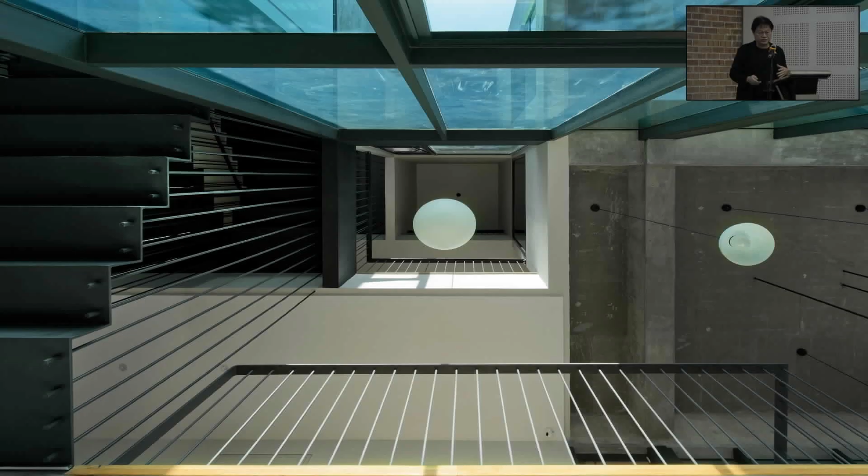So what I did was this time I built a structure up, almost like a water tank in concrete, and I suspended the rest of it. I used that concrete structure because steel is very strong in tension. If you don't believe it, you take a steel bar, you try to, you can bend it, but you can never pull it until it becomes so thin and breaks. So what I did with this house, I built the concrete structure, almost like a water tank, as it was rectangular, and I hung all the spaces below. Another thing that I've used quite often in most of my custom-built houses today is I hang the staircase from the roof down.

I find it's much better for me because old staircases are concrete, and you need 2 or 3 tradespeople to finish it off. You need to cast the concrete, and it's never casted correctly - you got to hack it and repair it. Then the handrail guy comes in, then the floor finish guy, and then you got to do the sides. Everyone who comes in destroys the work of the earlier one.

They just go back and forth, and the staircase becomes the most difficult part to finish properly. So what I do today is hang all my staircases using steel, hung from the concrete structure above, which usually has a 25% safety margin. I use a singular material, which is steel, and the staircases are there.

This one, I did another one, which is a partition that divides the space. And again, the whole shelf - this guy collects old terracotta, expensive terracotta. He was a bit worried because there were no legs except the wires that hold it to the ground.

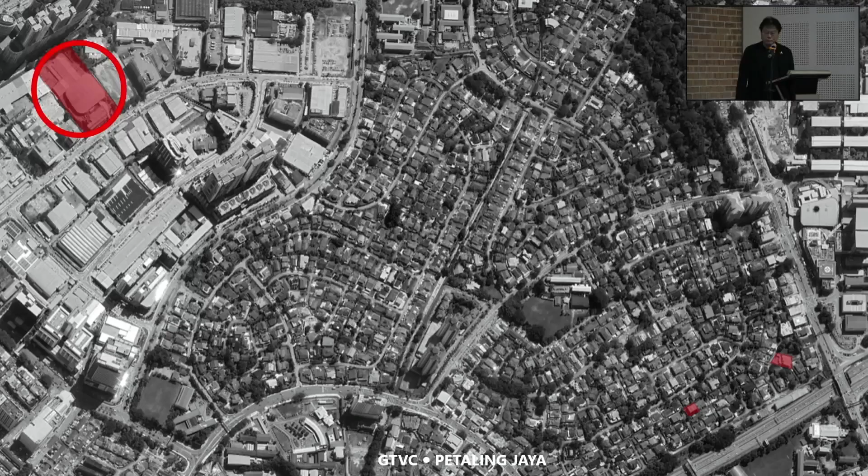So that's the house, Kamari's house. And I had a chance - I was selected to do my church, this Glad Tidings in section 13, and the land goes down, but going down gives you the opportunity to tuck all the services underneath. For the church, I was influenced by Jørn Utzon's Opera House that you actually walk up. So I just came out with this sketch, and then we did that design.

And again, I tried to look at parametric design, even though at that time I didn't have parametric design. I actually built a model, and I think Swissma, you built the roof for me, right? I don't know how he built it, but we got it done. Okay, it's asymmetrical - it's not a symmetrical sort of thing.

And I think it's standing seam, right? Yeah, still standing. It's got 3 auditoriums inside, so it's actually quite a large building.

And they wanted an external chapel, so we again used steel and tried to make it as thin as possible so that it looks like it's floating off the ground.

I think you've seen these slides. This is a Setia Convention Center where we used standing seam and did almost like a spaceship landing there. This piece of land in Setia City is fronting the lake.

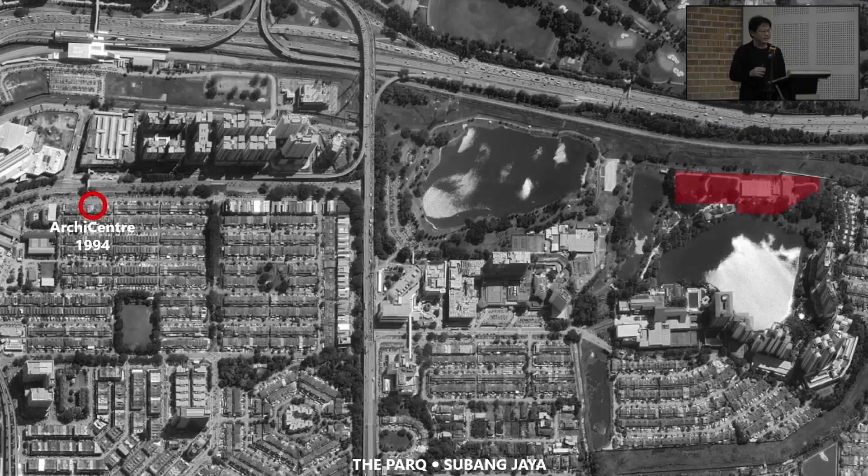When we first started my practice, I left BEP and joined another friend of mine from Deakin Uni. We had no work. For the first year, by 4:30 we were already free, so we used to go fishing. We spent all our afternoons at the lake - that's exactly the same spot where we would fish. My wife would finish work about 6, then come join us, and we'd go for dinner. She was my girlfriend then. Those were good old days before we got married.

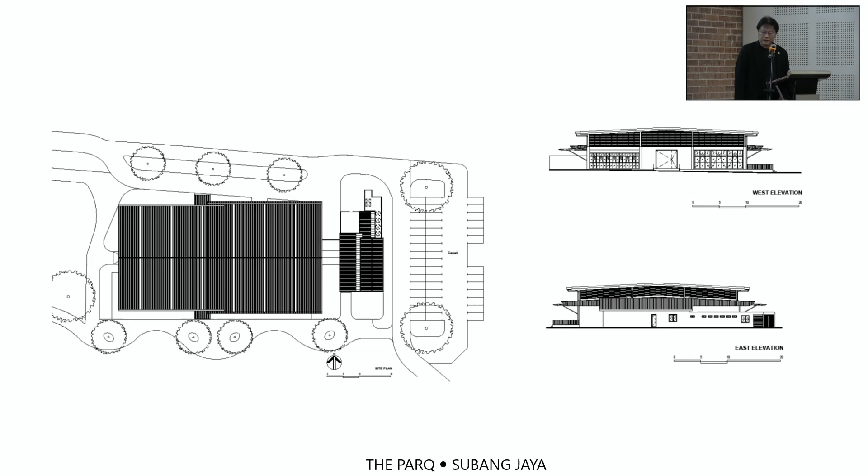So that's the completed building - it's actually a real photo. A lot of people think it's a 3D animation, but we wanted a simple white building in a green environment. We totally refurbished the existing building, spending only about 2 million on it. I kept the little shed and told them not to demolish it, because that to me had the only domestic scale in this very white building. Today there's a cafe there, and it's the most popular place in the whole location.

All the walls have a counterweight, so you just lightly pull the chain and all the walls open up to give you this full view of the lake. That's with all the windows open.

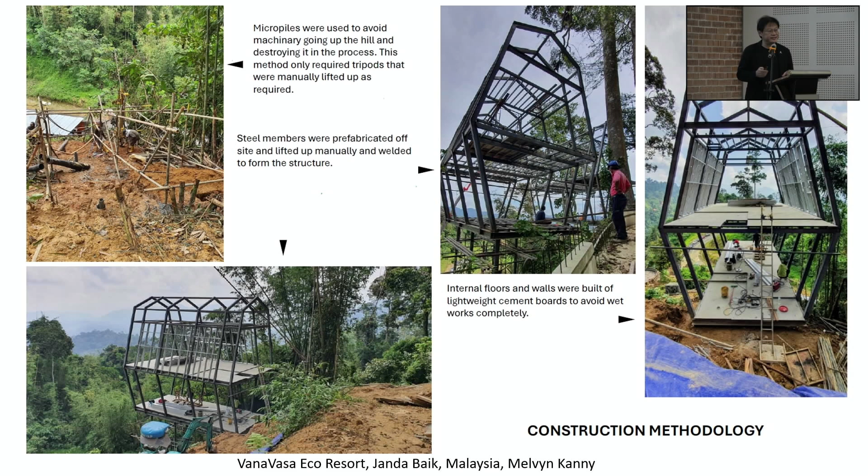And on Sydney's North Shore, where it's very slopey down to the waterfront, a lot of those houses are so-called pole houses. And when I saw this submission and the presentation, I felt that this is a pretty good pole house, yeah, except that it's in steel. And those are the completed.

It almost looks like, you know, if you collect honey from the Orang Asli, it looks like the tualang bee hives on top of the tualang tree. And I thought this is so biophilic. And when I saw it was from Malaysia, I told my office, I think we need to up our ante. We need to improve our design because we've got people that are already doing this sort of thing. Okay, so I just want to, not to make you jealous, but to make you think out of the box.

And I met the installer. Unfortunately, it's not Swissma. I think Swissma's competitor. But likewise, Swissma can actually help you with a lot of the detailing. It can no longer be done without the specialist being involved. So I think sometimes we just give Mr. Lau a very unusual form and tell him to solve it.

The other winner for institutional buildings is Masjid Dain Abdul Rahman. This from Razin. And again, it's totally using steel as a framing and using it to create a permeable skin, a second skin. So when you're inside and you're looking out, you get this filtered light, and then you've got trees in the veranda space, and you feel like you're actually worshipping in a forest.

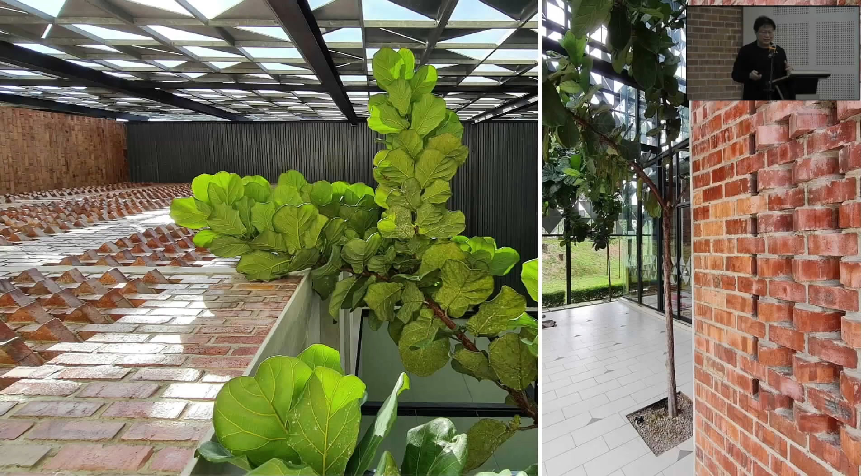Okay, and the merger of raw materials, nature, and using steel framing as a skin. The metal is actually only one shape, but he randomized it in such a way that if you look at the leaves, it is as though nature controlled it rather than following a formula. And beautiful mosque.

And another winner was from Sarawak. Interestingly, it's the CIDB Convention Center. So even the Sarawakians are really catching up with us or scaring us with their design. It's by Archiscape, Kwek Desmond. And that was the final shape of it. And very nice, pure form.

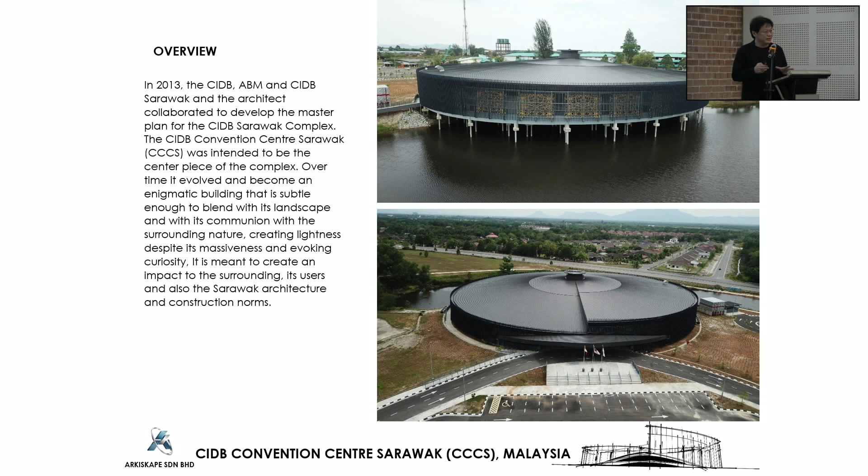And that's the building. I think the jury was very impressed when they told us that before they started construction, there was a crocodile in that lake. And they had to move the crocodile away. Otherwise, you couldn't get the building built. I must use that story for my next awards.

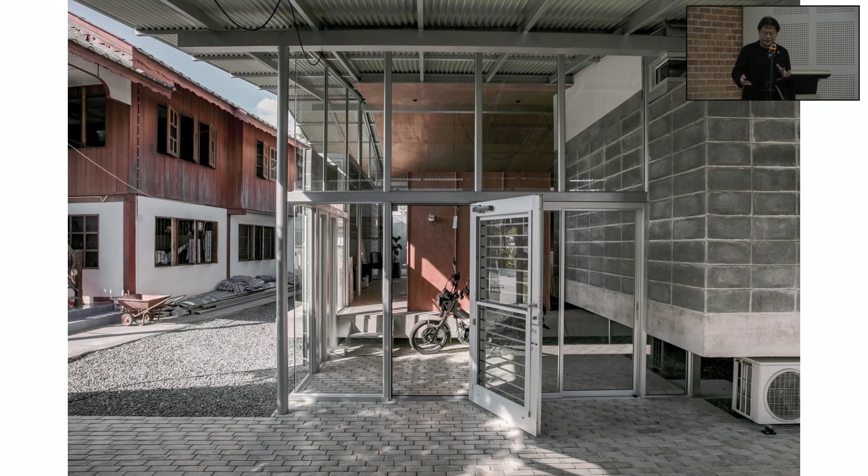So I earlier showed you some of the slides, and the jury, it was a very interesting intellectual jury. There were no people from the industry. So we actually had good discussions, and we talked about what it reminded us of. And I said, this building reminds me a lot of the Farnsworth house.

The platform, or serambi as we know it, lifted off the ground, and then walking one or two steps into the house. And even the bed is lifted off so that it's cool, the slab is cool. Very minimalist columns, and a very simple roof that was later lined with plywood. Very simple building.

But you look at this image and it reminds you of the Barcelona Pavilion, of sliding walls not fully enclosing a space, where space sort of flows one into the other. The top is ventilated, the bottom is ventilated, as opposed to all the shanty buildings next to it, which are traditional craft, where everything sits on the ground. Suddenly you get this same looking thing that fits into the environment, but it is like a piece of craft art. It's a piece of art that landed there.

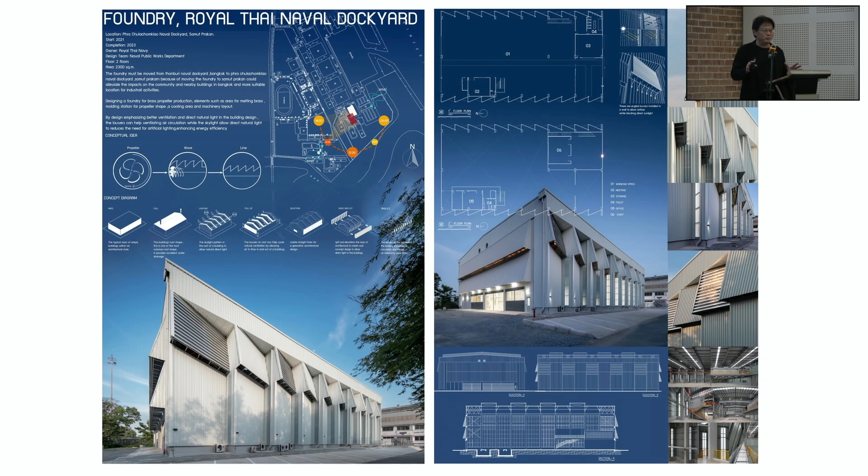Anyway, I'm just showing some of the potential of steel, okay? And this one was another surprise winner from Thailand. This is Thailand's Navy architects, and both of them that came to receive the award were ladies. One was a colonel. They got quite pretty army people. And an incredible building. And I don't know why our factory buildings don't innovate like this.

Okay? So when we saw this building, you look at the front elevation with the two vents at the front, and the site is so simple but so efficient. And I'll try and explain it. You can go into Google and find it, I guess. It's a typical rectangular box, but there's so much.

I think in the army, there's not many projects to work on. They probably spend a lot of time on it, right? Whereas to us, we just draw a square rectangle, pass it to a draftsman, ask Mr. Lau to give us the cladding detail. But there's a lot going into this building.

And the first thing I told the jury was, it reminded me of the AEG turbine factory. And this was a groundbreaking building before the Bauhaus movement, for those of you who study architecture, by Peter Behrens. This was the beginning of glass, full height glass, four times volume, creating almost like a cathedral for the Industrial Revolution. And to today, it stands there as an incredible marvel.

And this is their building. You look at that, it's got the two little holes. So when I asked them after they received the award, have they seen this AEG turbine factory? They said no, they never heard of it before. And I thought, oh, we thought the inspiration actually came from there.

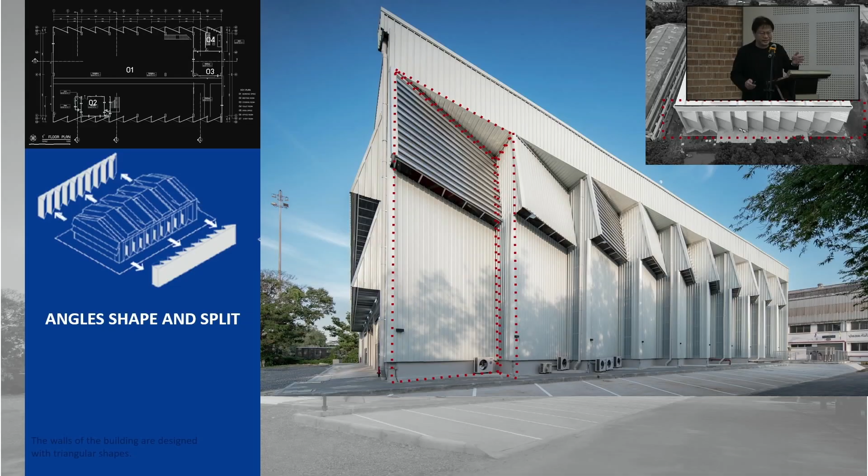Look at the side walls. Singular material, steel and steel cladding. When the wind blows, it's not flat. It actually gets captured into the building. You can see from the plan at the top, they just skewed all the walls, and the wind actually comes through. This is a foundry factory. That means there's a lot of steel, a lot of heat in the building. And they staggered all the walls, and the top panel is lifted up, and daylight can come in as louvers.

So that's the side view, and you can see from the dotted red lines how they use it as though it's inside and outside, the air just penetrates through, and it's just a simple factory building. And at the top there, in case it rains or anything, they can still vent the building. And beside the red one, you can see they alternate between a solid and a louver, so you get diffuse light coming in.

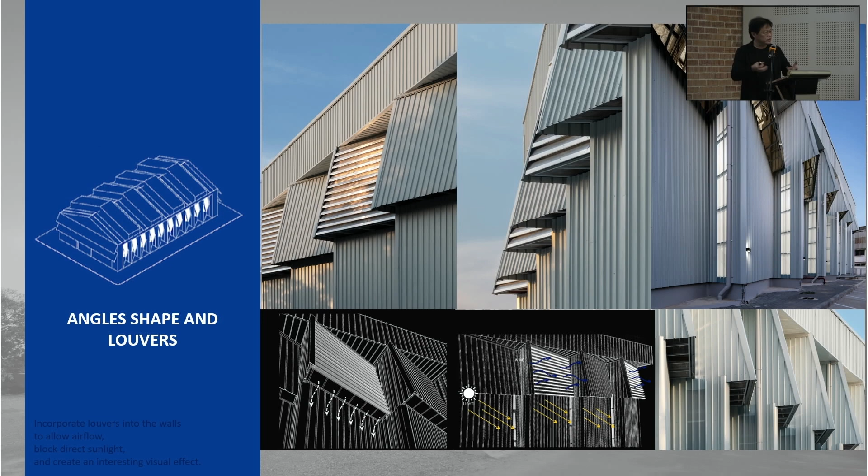And just by doing these undulations, when the breeze comes, it creates low and high pressure points that generate suction out of the building. And we just thought it's a marvelous piece of singular material, nothing elaborate, nothing expensive or innovative, just a simple, singular material. Beautiful building. And it works.

After we did the jury work on this, we talked about it, and the jury said, we have designed so many warehouses, and not a single one of them has this kind of elaborate detailing. And we thought, when you judge a competition, it really gives you a lot of information. Yeah.

So I just want to end. I haven't taken too long. Thailand is very advanced in steel design. I think you can buy these books. I think Bashir can order for you. It's by Li-Zenn, a printing company owned by A49, the biggest architectural firm in Bangkok. A49 is similar to our GDP, except that they do a lot more things.

They started Li-Zenn at the same time when I was PAM president in 2005. We wanted to publish a book on Asian architecture. After I finished my presidency, the next people who took over did not follow up, while the Thais did all their research and their section of the book was done. Then they asked us, where's the rest? Where's Singapore, Indonesia, Malaysia? The new people didn't do anything on it. So Nitis, the son of the founder of A49, said, never mind, we're going to do our own. And that's how Li-Zenn was born.